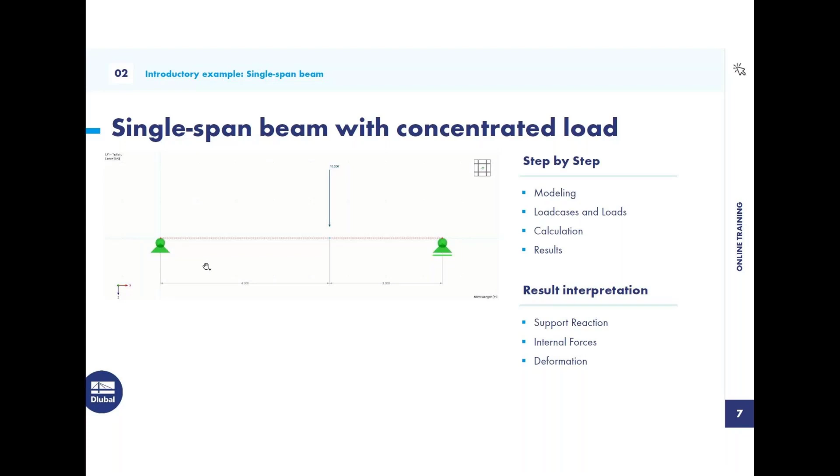First I will show you the modeling, then how I create such loads, then we will calculate this, and with Mia we make a control. So maybe then let's switch to RFEM.

Yeah, okay, back to the user interface. So for example, when we want to create nodes - they are the beginning of every modeling. Nodes are the begin, and on these nodes you can put lines or members, and surfaces need these lines as border.

So yeah, for example, with nodes, you can start here in the navigator, data, and click for a new node, and I will show you.

You can also here in the menu, basic, click also here nodes, or in the table you have also the option with the coordinates to create nodes, or even here in the shortcut. So you see you have different ways to model, but yeah, okay, then let's start.

I will close this, and then let's start with a new model. I call it online training.

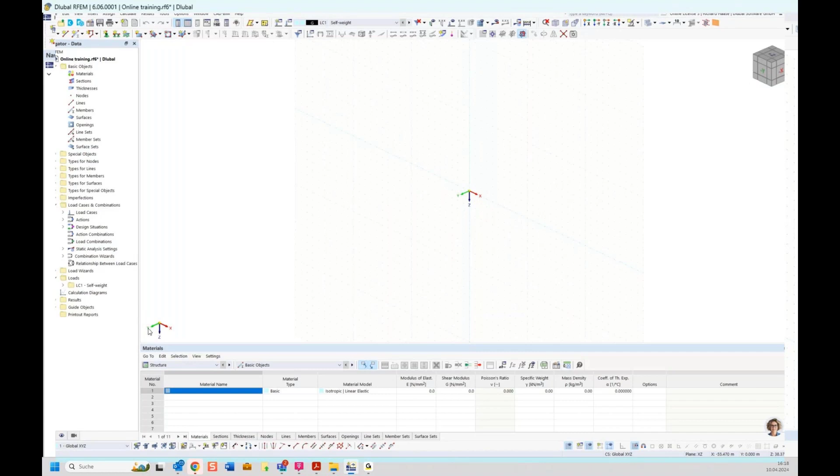How it's connected to the global axis system. You see the Y direction when I click on Y, or when I go to the X. Same idea here with views in X, Y, Z, or you can choose other directions. Another option is when you press Control and the middle mouse button, you can also turn around.

But let's start with the modeling. Our system, I said we have a 7.50 meter long single span. So let's begin with the nodes. I choose the shortcut and click to the 0,0 coordinate with it.

Now we have the first little problem. When I go here, we see the 4 meter, and when I go here, 5 meters. We want it in the middle. Now we have different options.

First, I can click on this node, and in this case it fits perfectly because we start at the 0,0 coordinate. Then I could change the X coordinate to 450 and say OK. Now you see it's on 450 how we want it.

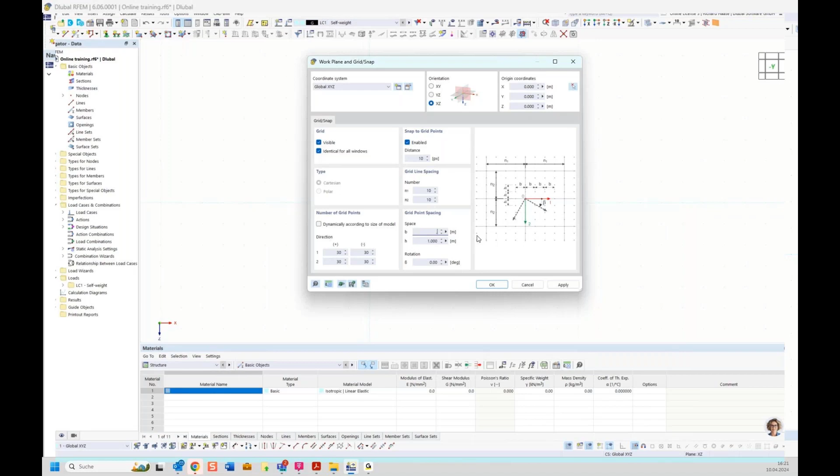But you also have another option. You can go here to this button, settings on work plane. The default setting here is a spacing of 1 meter, you can see it in the picture. We want to change it to 1/2 meter. Say OK. When I delete my node again, we can see here.

350, 450. So you have these two options to create nodes in an easy way. Then we need the last point at coordinate 750. Let's do it this way.

And maybe I'll set it to the default setting. You can also do it here. So now we have 3 nodes.

Maybe I showed this before: when you left click and go from left to right, you see orange color, and from right to left, you see blue. Maybe I'll continue first with a line. Let's go to the node, to this, and again to this. So when I go left to right with this orange color, and for example here over this line on this node, you see only this node gets selected.

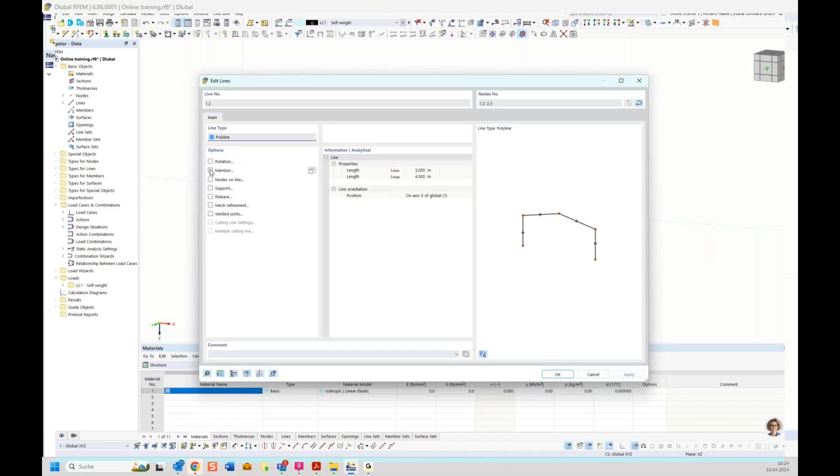Now this logic is defined throughout RFEM6. Maybe you remember with the base data, with the add-ons, where I said you must activate it so that the actions can be used. It's the same principle here. So we have this line, and want to transform this line or give this line some properties, and we say we want to transform this line to members.

Then it opens a new menu, the new member menu. What can we see here? A member type. The beam is, I'd say, the default type. The beam gives all forces to other objects.

For example, when we go to tension, you can always orient by these pictures. So we see here: for beam, all forces; and for tension, you see only tension forces can transfer to other objects. Same for compression, it's only negative forces here.

But let's go to another member type: here is a definable stiffness. Maybe it's interesting for you in your study time. There you see we have a new tab here, definable stiffness, where you create a new stiffness type. Here you can manually define all stiffnesses, torsional stiffness, bending stiffness, and so on. Maybe it's perfect for your book exercise, and you can manually create your beam this way.

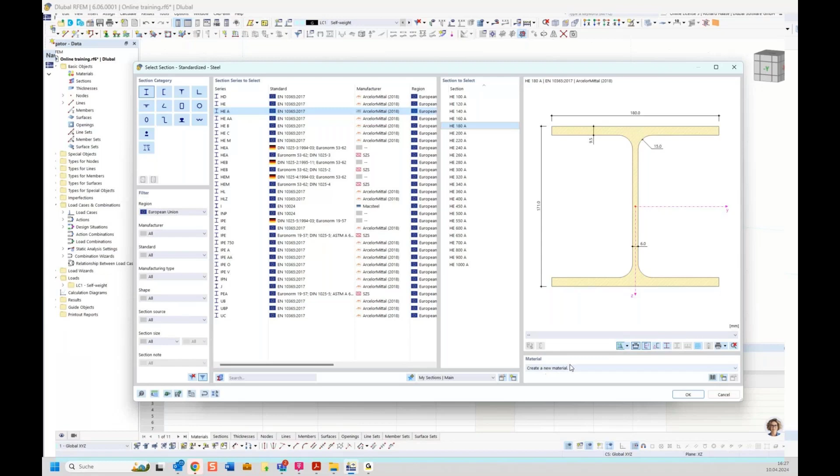And now you see this yellow color, because we don't have a created material yet. So let's create one - there's again a library button.

Let's say European Union, material type steel. And then you see, oh my God, so much steel. How can I find the steel I'm searching for? You see here this searching function.

Let's take an S235, and the shown steel options are reduced. Here you can see, let's select such steel, say okay, and you see the yellow switch to blue. The blue stands in our program for steel, and we say okay.

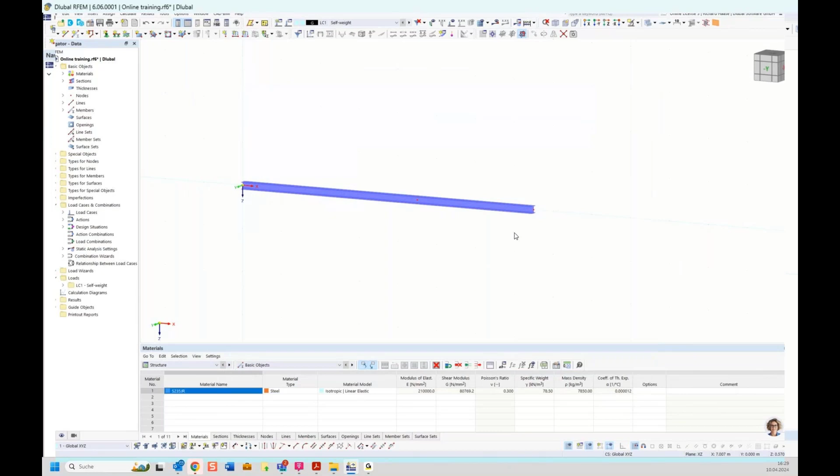Now we have an HEA 180 with the steel as S235. Say okay, and okay. And now we can see our property-less lines are transformed to steel members.

So what we need are the supports we have here and the loads. But before modeling this, I will give our AI assistant the chance, and she will calculate, and then we can control the RFEM6 results against the results of our AI assistant.

I copy from my document: a single beam with length of 7.50 meters with a single load at 450 of 10 kilonewton, and I want to know the bending moment at a length of 450. Then we start, and let Mia show us how good she is with her statistical knowledge.

So, in parallel, we can start modeling the nodal supports.

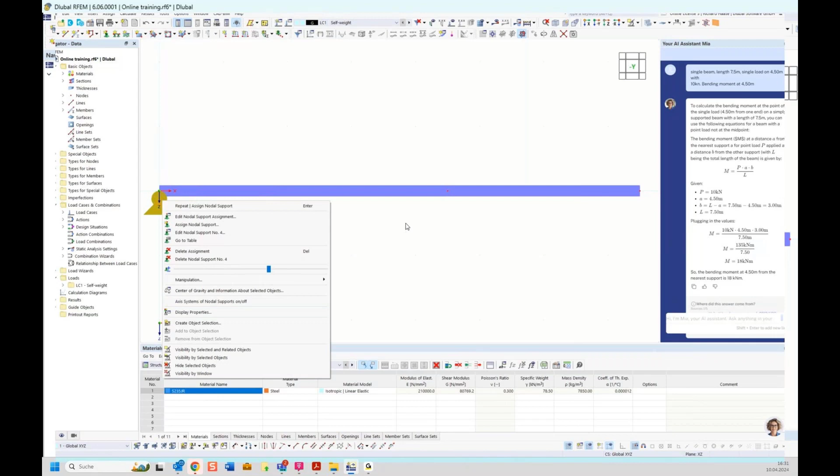And okay, we need another. We say we need here a nodal support with roller properties, and we say this. Take our point. Okay.

And yeah, what is missing? Maybe to control the length again, you can click here for dimensions. Okay, didn't I click on my first node?

Now we need our nodal load. We go to the option loads, nodal loads. But you can also do it here in the shortcut, new nodal load, or even through loads, nodal loads. So everywhere, also in the table, you have the chance to model in different ways. Let's do it this way: a new nodal load on our load case self-weight, and take this 10 kilonewton, that direction. Okay, on this node, say okay.

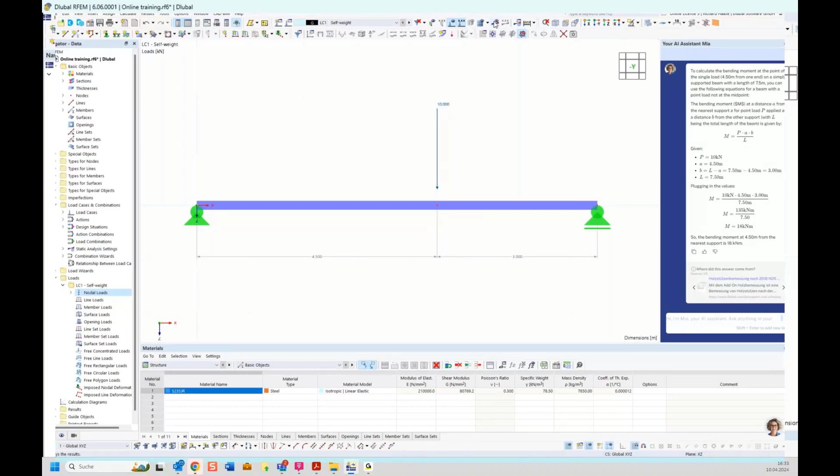On this button, you can start the calculation. For this load case, you also have the option to calculate all, or when you have more than one load case or a lot of load combinations and other things, you can select what the program should calculate. Global deformations - you see here the navigator results is new because we have calculated and have some results here. But we want to go to the members, internal force, and to the bending moment My.

Mia says we get 18 kilonewton meter, and our program said 20.4. So who's right? I say Mia is right, but what's the reason for this difference?

Maybe let's check the support reactions. So we have 10 kilonewton from the top side, and see here 5.3, 7.3... okay, it's higher than 10. So something must be wrong, or not wrong, but how can I say?

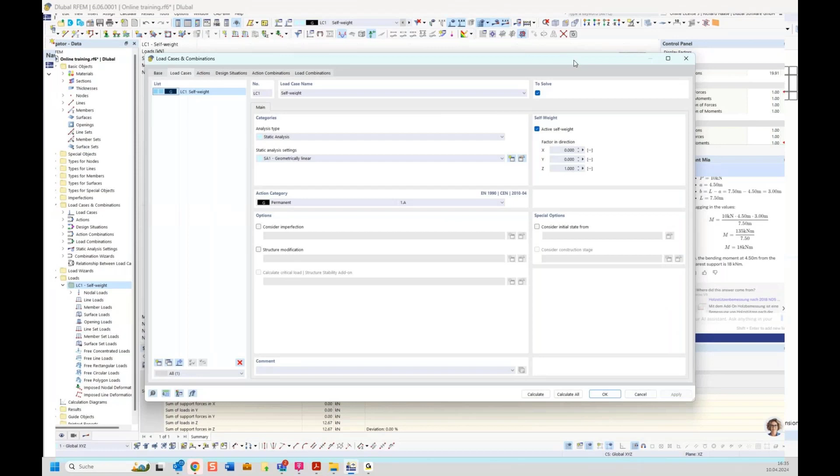We must prove some things, and the reason is the load case self-weight - when we go to edit, here we have an active self-weight in that direction. So we have created our steel section, and this steel section gives its own self-weight on the structure. The default setting is that it's activated, but I'll show you how you can deactivate it.

We go to the navigator and here to the display. Then we have here the loads and the self-weight. And you see here the 0.356 is the self-weight of this HEA 180 profile. And that's the reason why the results are not as expected.

So let's deactivate here the active self-weight and calculate our self-weight load case again with our nodal load.

Now you see here our 18 kilonewton meter, exactly that what Mia say. So maybe Mia can assist you with statical questions, or even if you have questions about the program, you can write it here and Mia will give you answers.

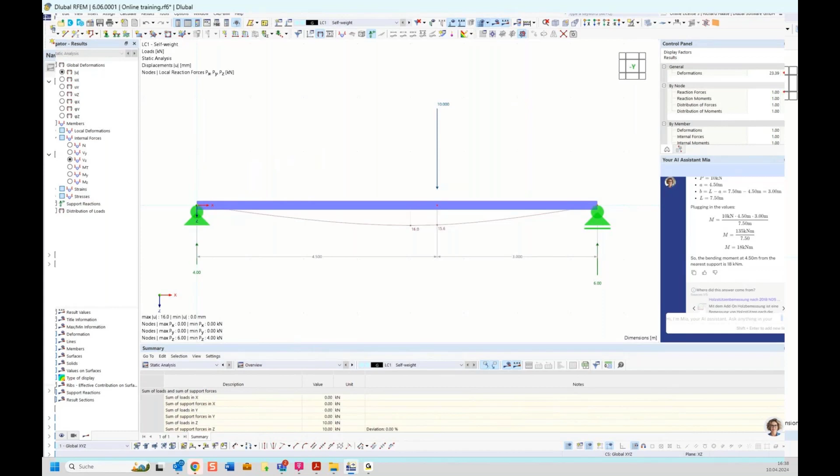Okay, that's enough for my first example. Then let's go to the next, a two-span beam with alternating load positions. We will create more than one load case, we will do 3. Then I will show you the combination wizard from RFEM 6, when you have different action types like self-weight and snow, wind, and so on, and how we combine it with the gamma and psi factors.

Okay, and another things, but let's start with the modeling of our second example. Okay Mia, thanks. Then I will delete my model. And we have 10 meters of the whole length.

So you have the options with the nodes and with the lines I showed you before, but there is also a faster option. You can create here a new single member.

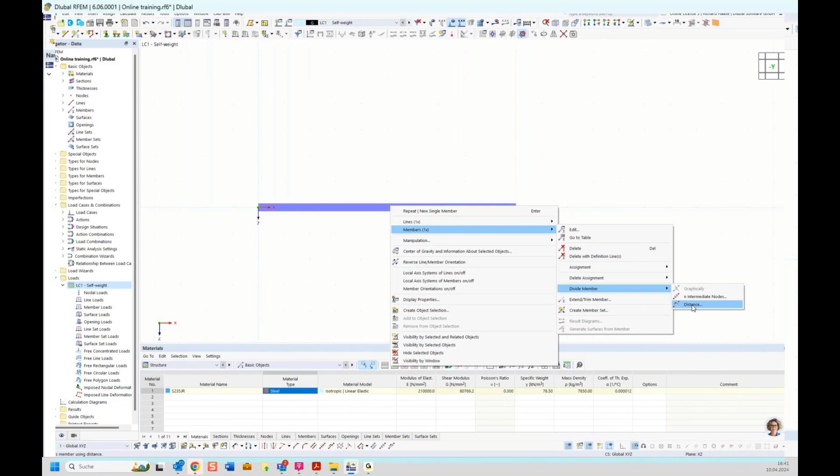Now we have a single span, but we want a two-span beam. So we click with the right mouse on this member, divide member, and the distance. Now you have the option between percent and meter, and 50%, 5 meter, that's exactly what we want. So we divide our member and have now 2 5-meter beams.

And now we need again our nodal supports. This type for our left node, say OK, and again such roller type nodal supports for the other two nodes, and say OK. And OK, then we have this.

And now I will show you how you create a new load case. You can right click here, new load case, or even in the shortcut, new load case, and again in the menu or in the table, so you are free. But I will show you here the shortcut.

There is our self-weight, we want to activate the self-weight again. And here you see the action category. The default setting is that this combination wizard is activated. So you have this action categories, and with help of these actions, it knows how to combine these actions in the load combinations. But I will show you.

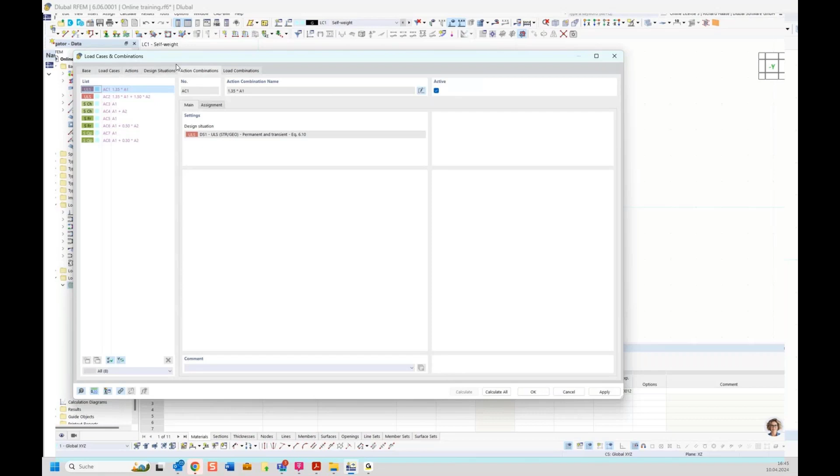Let's have a look at our ULS. So here you see Eurocode and information, the combination rules with this gamma and psi factors. Now we see he combines the actions, the A1 and A2 of our self-weight and the other action, and here the load combinations.

Okay, maybe here it's not so interesting, but I have another example where we have more than these two load cases. But you can see here he combines after this rule all load combinations.

Okay, that's okay. And now for our load case 1, we want to create a new member load, right click, and have 2.5 on both members. And you see, okay, he created. And for the left, the same new member load - on the left field, we want 5 kilonewton per meter, say on the left field. And now I could press the OK button, then close the load option here.

But I want to continue with my right field. So when I click here, apply and next, then I can see it's created, and I can easily switch to another load case. The same with 5 on the right field, and say okay. Now we are ready with our loads, and I close this with okay.

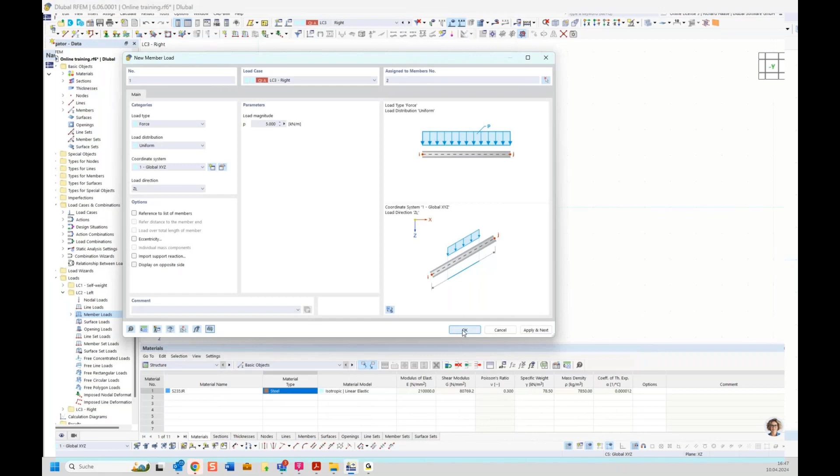Okay, and we can control it. We have the self-weight plus the self-weight of the HEB section, but I have deactivated it, though you can activate it again. Then our left field load, and on the right.

Maybe when you make controls with examples from literature, it could be possible that you get other results than in RFEM 6. And the reason I show you.

You can see it in the sections, this option, deactivate shear stiffness. So the default setting is that RFEM 6 calculates with the axial and shear stiffnesses, but in literature examples, most of the time they don't calculate with this kind of stiffness. So you can click here to deactivate it and make the shear stiffness infinity. I'll show you the difference with the shear stiffness.

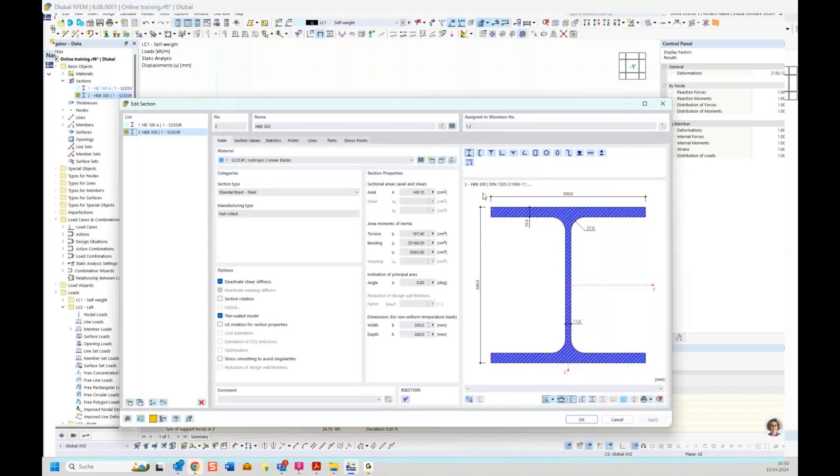So when we see the deformations, we have 0.3 millimeter here. When I deactivate the shear stiffness, making it infinity, let's see, we have 0.3. Say OK. We get only 0.2. So the system gets more stiffness because the shear stiffness is infinity.

So that's something you must know if you calculate with literature examples. Then deactivate it here, but I'll leave it active for our example. Okay, good. Then let's calculate all, and then I'll show you the results and explain something.

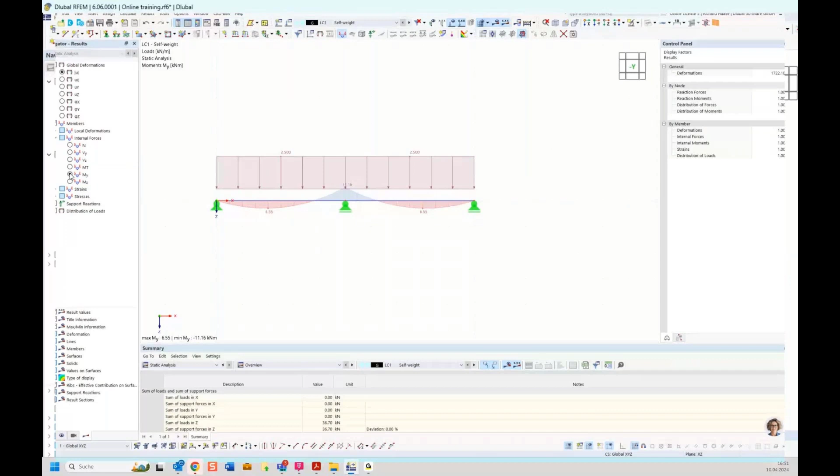Maybe we can choose the wireframe model here, it's better visible. Let's see the bending moments. We can also deactivate our self-weights and showing loads.

Okay, and we switch to our design situation. Now we see we have max and min values here. Why do we get this in this design situation? The reason is, I'll show you how he creates the combination rules. For the ULS, you see he has 4 combinations in this case, and out of these 4, at every location he shows you the min and max values.

Now we want to know where this result comes from. This minus 37, which combination gives us this result? You go here to static analysis, results by member, go to internal forces, and now we're at member 1.

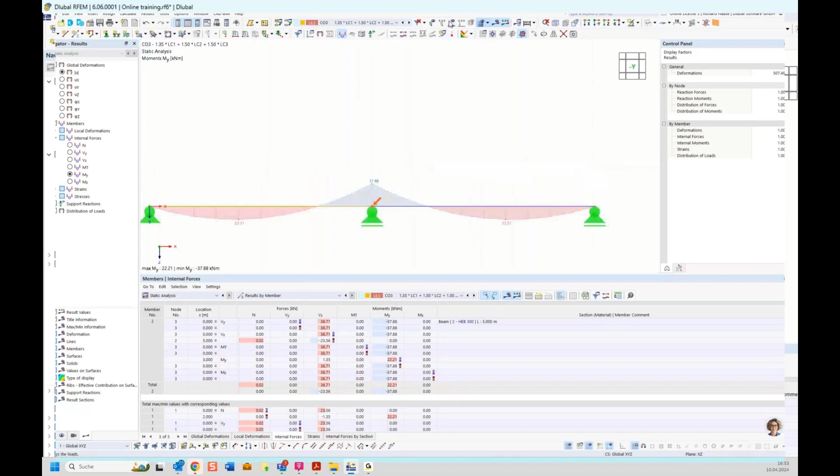So let's prove it, combination number 3. Let's show the loads again. And you see we have factorized our self-weight, and here the left and right field loads. So it makes sense that this one gives us this minus 37 bending moment.

Okay, then let's check it for the field bending moment. This 26.78, you say it comes from combination number 2. And combination number 2, you see here our self-weight with load case number 2, and load case number 2 was the load on the left field.

The same you can do for the support reactions. So maybe deactivate the member results, and let's see our support reactions. Now we want to know where this 77 kilonewton comes from.

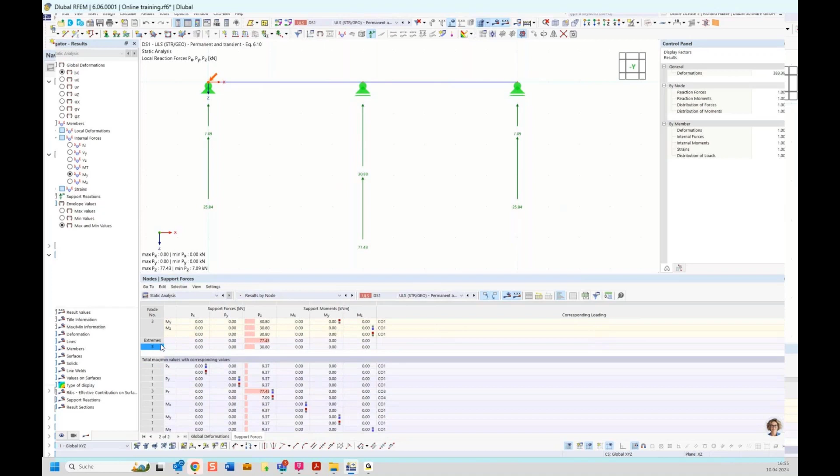Same principle: results by member, you must switch to results by node, because on this node is the support. Results by node, switch here to support forces. Now, see here, that's number 1, and we want to go to number 3. And you can see here number 3, we have the 77 also comes from combination number 3, and combination number 3 was self-weight, left and right field load cases. So that fits also well.

Okay, that was the second example. Then let's switch to the PowerPoint presentation.

And yeah, the next example is a Gerber beam or hinged beam. And this system, maybe it's the same as our 2-span beam, only here is a hinge, and through the hinge this 2-span beam gets statically determined. So they're a coupled system of a single span to a single span with a cantilever.

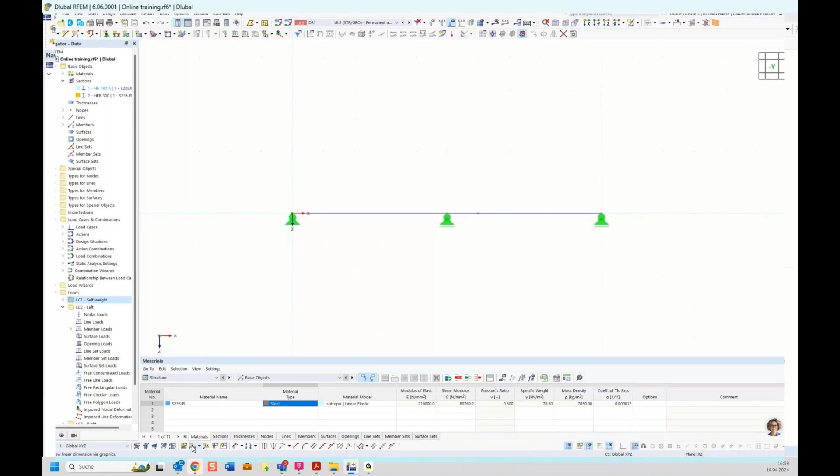Okay, good, then let's switch back. Let's say we take the same 2-span beam because it's more easy. Then let's say we want to divide this member and say only, okay, we say 1 meter. And on this case, we want to have our hinge later. So, but let's first set a dimension. Again, the second plane. Okay, for control.

Yeah, and another point for this Gerber beam is you see the maximum field bending moment is exactly the moment over the support. And it's for the design check more easy when you have one size to choose for the section.

Okay. Oh sorry, I open the German one. I switch back to English, sorry. One little moment, please. Okay, now it's open. I think you don't save it. Okay, then let's close and make new.

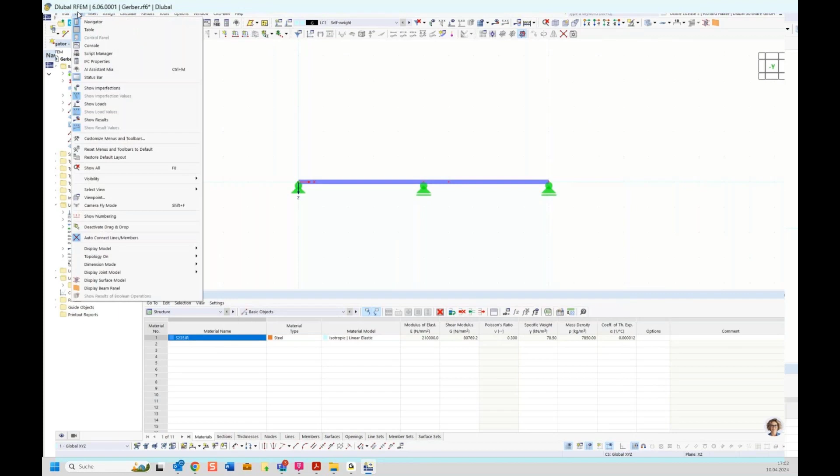And our nodal supports. And say here our roller, this one. Okay, a little bigger. Okay, so first, wait, okay, I will customize. Oh wrong. Reset menus and toolbars to default.

Okay, so now I show you how you parameterize your model. So the command is here under Edit Global Parameters. It's a little bit hidden. So when you can remember, I told you at the beginning that we have such a search function here, and you can type in global parameters, so you can find it there.

Or when you're working more often with this command, you can customize your toolbar, and therefore you go to View, Customize, Menus and Toolbars, and go here for global parameters. And every command you can find here or over this searching function. And I want to say, okay, this global parameters I want to add in my toolbar. Then left click, hold the left click, and I will add it here. And yeah, so we have it fast to find.

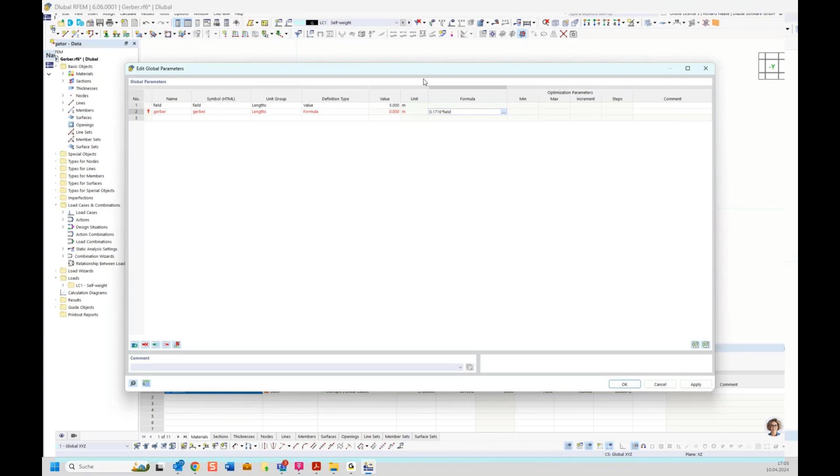So from our table book, it was 0.1716 times the field length. But this would be here, but we want to have our Gerber hinge here, so we must say another field length, and now we see, okay, it's at 5 meter... 858. Now, okay, now we have our global parameters, and now we must connect our model with these parameters.

So we go to, oh wait, before I forget, our dimensions. Okay, so good, maybe I save it. It's a good thing all the time.

Okay, so node 3. And now I say I want to have a global parameter, our field length. Go here and say, okay, and insert. Okay, 5 meter was before 2, but you see here this little yellow symbol, and there the fx sign for the formula, and say okay.

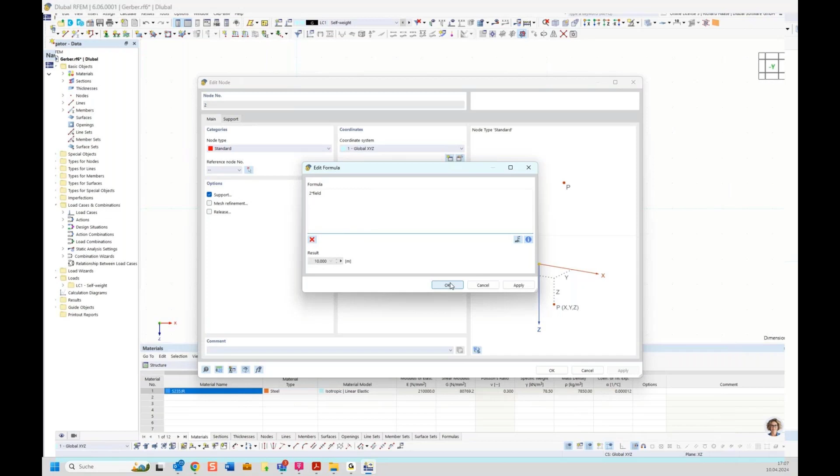And our second node, say here, and say okay, we want to edit the formula, and we say 2 times our field - that's the name of the global parameter. Say okay, and you see here 10 meters. That's right. Okay. And now our Gerber hinge.

Say again global parameter. We want to have our Gerber system, and you see our 5 meter with the yellow symbol. Okay, and you see before it was 1 meter, and you see it switched the length.

The last thing which is missing is our hinge. So let's go to the member, and again the same principle. We want a hinge. Important here is you see the direction - this is the start, and this is the end of the member.

So we need a hinge at the start point. We click hinge, get a new tab here, hinge, and we want a member hinge at the start. A rotational hinge, is that what we want to have? Say okay, and here we see our hinge. It's always the biggest size, but you can decrease or increase the size here again.

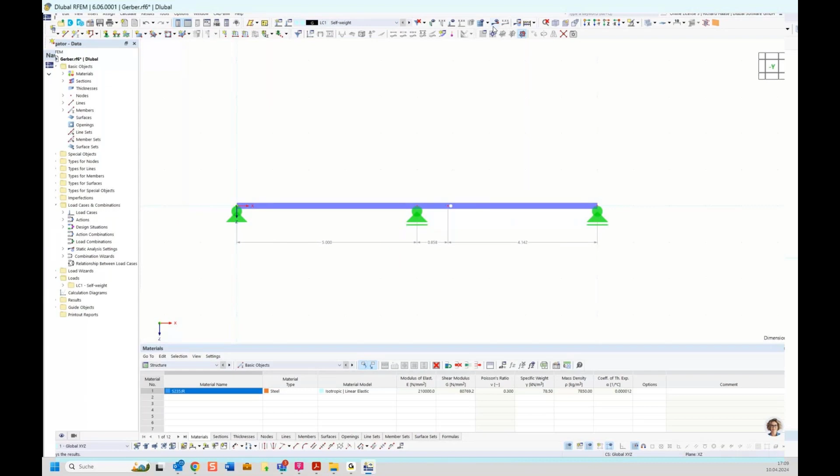Okay, so then let's view the self-weight load case to see if it functions. Global deformation we don't want to see. We want to see members, internal forces, and bending moment my. And we see here the same results in a field and over the support.

Now we want to check if the parameterization functions. So when I say okay, I don't want 5, I want 7 meter field length. Okay, it's a little bit big, so, and say okay. So you see 7 meter and 7 meter, and the hinge also springs.

So then let's prove it. Yeah, and you see, okay, a little difference, but 150, so we can say it's right. And yeah, so you have now a parameterized Gerber system. And yes, this parameterization you can use for all models you can imagine.

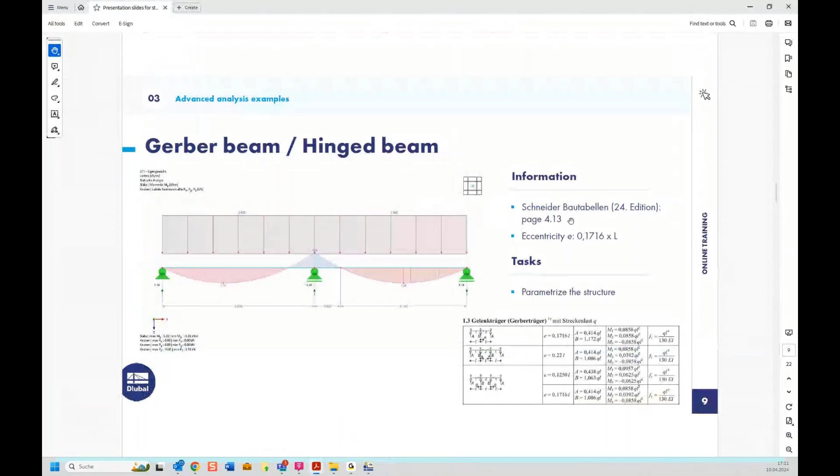And if you have such systems more often than one time, that's really good and saves a lot of time. Okay, then that was this example. And now, at the time we only used the member type.

Now I want to show you a frame with a tension member and show you the effect of such member types, and also the combination - you see here we want to model snow, wind, and temperature. Okay, then we can delete it here. Oh, wait. Sorry. Okay, yeah, then let's create our frame.

So we have again our HEB 300. Say okay. And 5 meter in height, and 5 meter and 1, 2, 3.

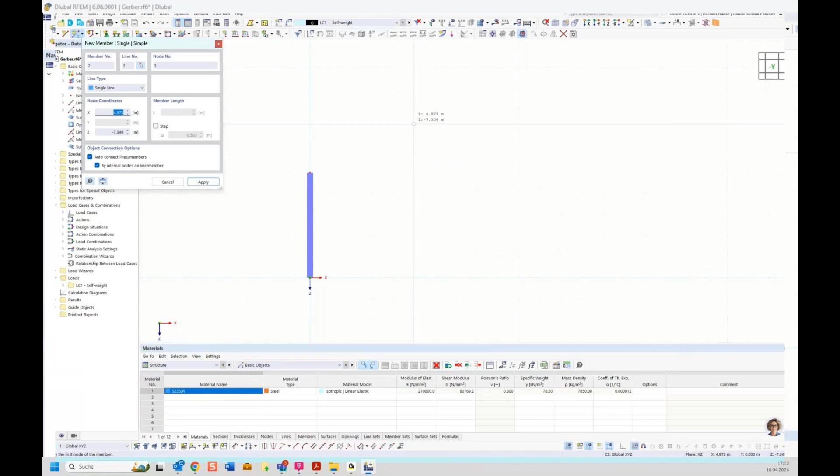And now, okay, our frame is symmetric. So you have the option to draw 2 other beams, but I will show you an option. Here it's fast, but when you have a big hall and it's all symmetric, you only need to model one half and the other you can make here. You can mirror the objects, and now I will show you how it functions.

So you select your objects and say mirror selected objects, and you want to create a copy and must set the plane. So you want the mirror plane as YZ. You must change it here to YZ and change a point - say here this top point - and say okay, and now you see you mirrored your system.

And yeah, for bigger systems or with symmetric and big systems, it saves a lot of time, and it's a very nice function.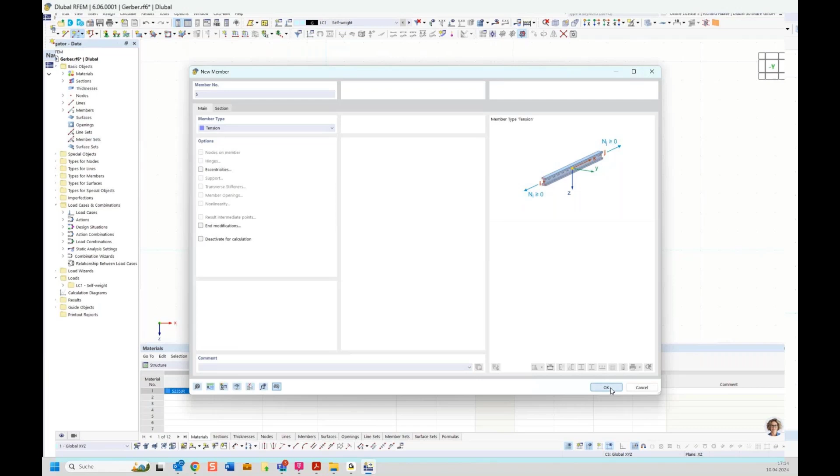Now we want our tension member, only positive forces. Okay, and select him here. Oh, yeah, it's the wrong section type, but let's change it fast.

We go to the library and want a bar type, a round bar with 30 millimeter. Say okay. Okay, it looks better. Good.

Yeah, then I want to show you first the loads. Let's make a new load case. We have here snow we want to have, and another wind, and yeah, you must choose a fitting action category, and another one temperature with action category temperature.

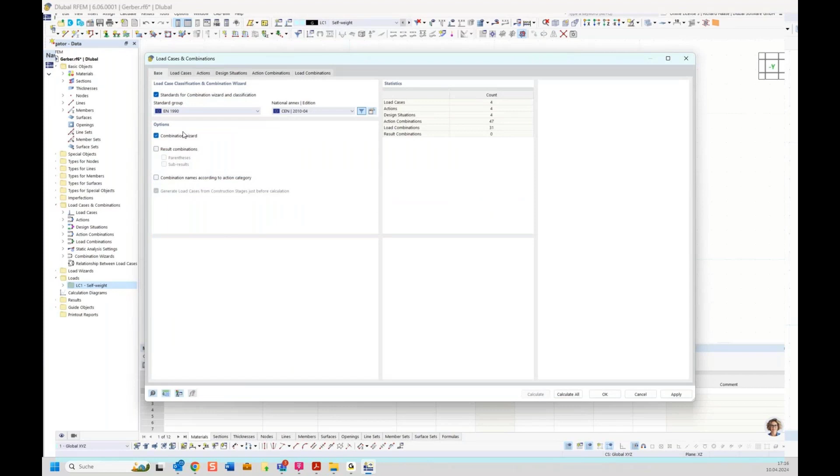Okay, so now we go to actions. You see, okay, now we have here on this symbols also that fitting action category, and now it's interesting and saves also a lot of time, this automatic load combinations with the combination wizard. And okay, that's only the self weight, but look here, we have self weight, snow, and wind with a leading action category, and the not leading get the psi factors.

So, and this is very good, and you have more for fatigue or for seismic. So different rules, and with the help of the wizard, you don't need to make it manual. It's fast, and you're on the safe side and have all possible combinations.

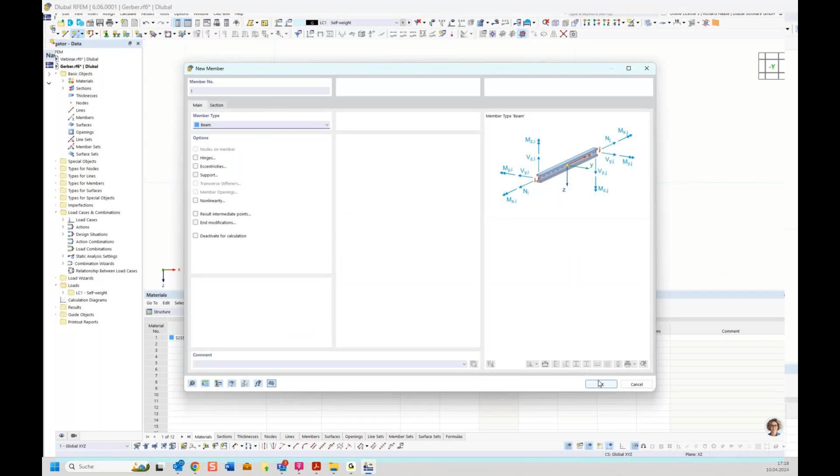Okay, restore. I hope he saved it. Then let's fix modeling it again. Wait, maybe I have it here. Gerber, maybe. Okay, then I have some right materials. Okay, so we had here our 5 meters.

I started new, must depend on this new GoToWebinar. Normally it don't crash. Cannot be moved. Okay. Then I will try it again, and he is away again. Okay, one more time.

Otherwise, we can maybe go into the coffee break, and I can try to either model it afterwards, or we leave this example. Oh, okay, maybe yeah, it's a better idea. Yeah, okay, yeah, maybe my PC gets some problems with the new GoToWebinar. Yeah, then let's do it in this way. Yeah, then let's go into the coffee break.

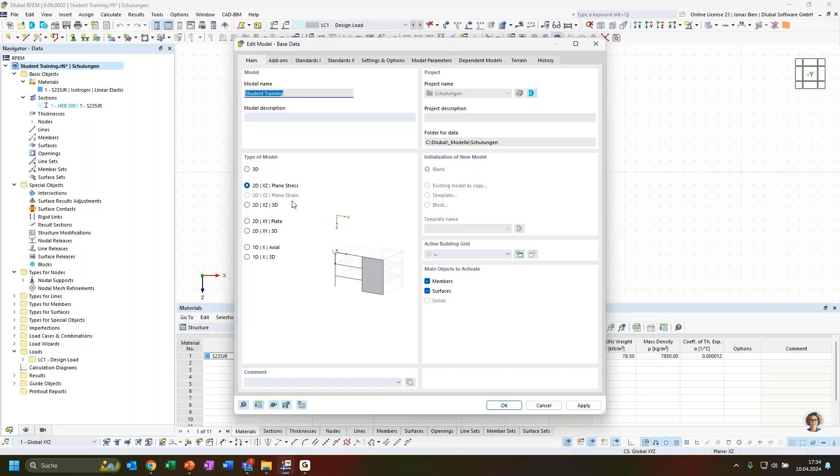Okay, let's go ahead and go to the program. I opened a blank model. The only objects that I already included in this model are material, an S235 mild steel, and an HEB 300 section. This was already defined by Richard, so you know how that worked, and I won't go through that again. The model is also still based on a 2D type model, so we will not yet go into the three-dimensional realm.

Yeah, all right. So first of all, we model the single span beam. So therefore, we create a new member with a member type beam. The section would be HEB 300. Click OK. The length should be 16 meter 50.

So I don't have a point to grab here, so it's actually hard to find the correct length. So therefore, I would just use this input dialog to set the length to exactly 16 meter 50. The important part, if you use that, is that you don't go back into the graphical user interface. If I type in something here and then go back to the main window of RFEM, it will directly overwrite my input value. So I need to make sure that when I input this value, I hit enter or apply before I leave this window with my mouse cursor.

Alternatively, one other solution would be to adjust the grid or to manually change the coordinate of the second node. There are multiple ways to define this beam of this exact length.

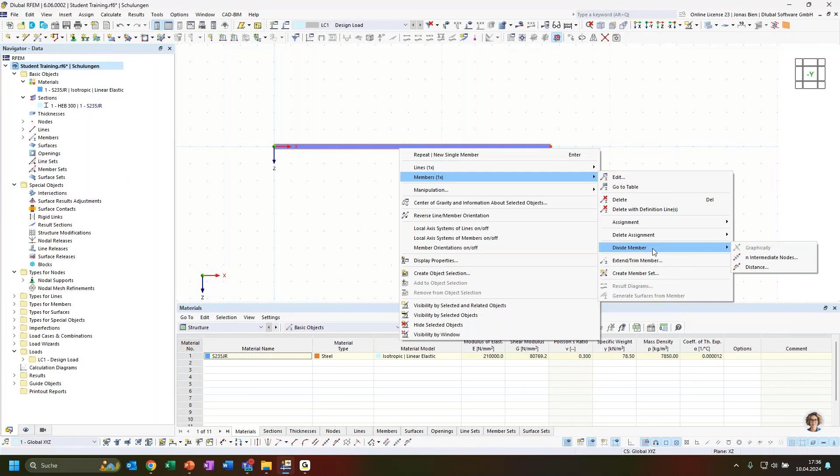Then we had two additional nodes on this member where we want to connect the vertical truss members. So I divide this member by two intermediate nodes, and I set the option to create nodes on member, because I don't have to divide this member this way.

It can stay one single beam element. Now, how do I define the secondary truss structure in the best way? One simple way - let me show the task again. The vertical distance of these two nodes is given as 1.40 meters, and the vertical distance at the

member ends would be 2.30 meters. So in order to achieve this position of the truss end nodes, or to create these truss end nodes, I can use my copy function. And I think the best option would be to take the nodes on member, the intermediate nodes, select them, go to the copy function, and say I want to copy these nodes in Z direction by -1.4 meters. And then I need to make sure that I want to create a copy.

And because these nodes originally were nodes on member, when I copy them away from this object, they are directly transferred into a node of type standard. And now I could define my truss members between the two nodes.

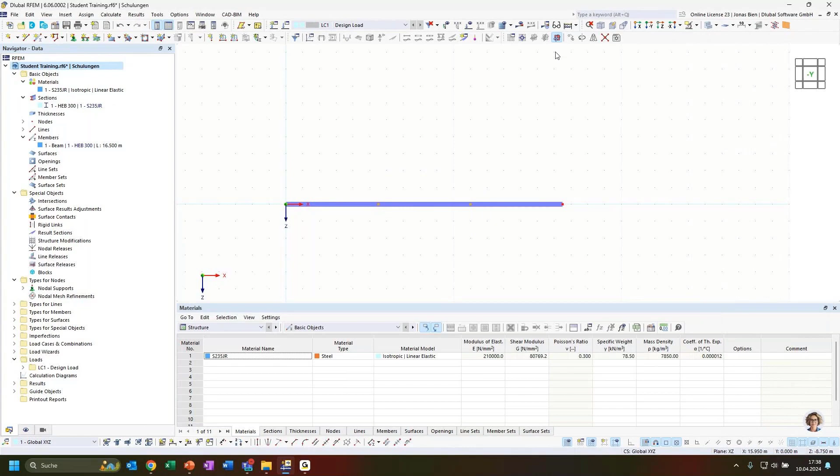What I could also do, and I want to show you that alternative option - here it doesn't make so much sense, but in larger structures that's a very nice feature you can leverage to speed up a modeling process.

So I again select the two intermediate nodes, want to create a copy, and then in the additional options I say I want to step the links. That gives me the option to not only copy the nodes, but to directly

create lines between the two nodes, and I can also on these lines directly create members. So when I hit OK now, it would copy the nodes, create lines between the base nodes and the newly created nodes, and create members. And how this member should look like, I have to define.

I could either give a template member from my structure, or I define a new template, and that I want to do because this definition of this member should differ from the first beam I defined. So I want now to have a truss member, and the section shouldn't be HEB 300, but an IPE 200 beam. So I create a new section, created via the quick search up here, and create a new section number 2 of the type IPE 200.

One thing to add: Richard already told you that on the right side here you see which degrees of freedom these member types have, and there's a very nice indication of what internal forces are transferred at the end nodes. If you are unsure, I want to add that you can always

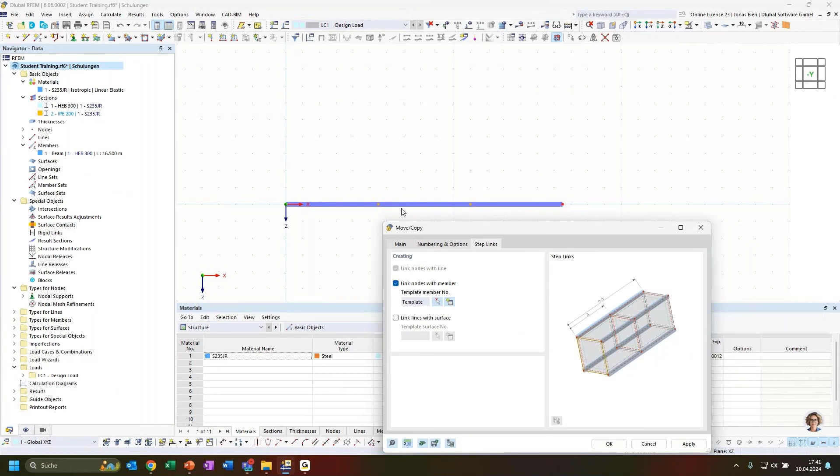Now I have finished the definition of the beams that I want to create with this move copy command, and then I click OK. And now you can see with the copy command for these nodes, I have directly now 2 additional members, and I don't need to do anything with this - that's already quite nice.

And then in the second step, I would take the outer nodes at the beam start and beam end and copy them minus 2.3 meters in that direction.

I could also, like if I have the dimensions here in this PowerPoint presentation, 1 meter 40 plus 0.9 meters, of course I can calculate this in my head, but if I don't want to, or if the numbers aren't that even or easy to sum, I can type the mathematical operation in this input dialog, and it will calculate the correct value for me.

What's also nice is I can enter values with units. So if I type in 2,300 millimeters, it will automatically convert it to the unit used for this particular input. This is very smart.

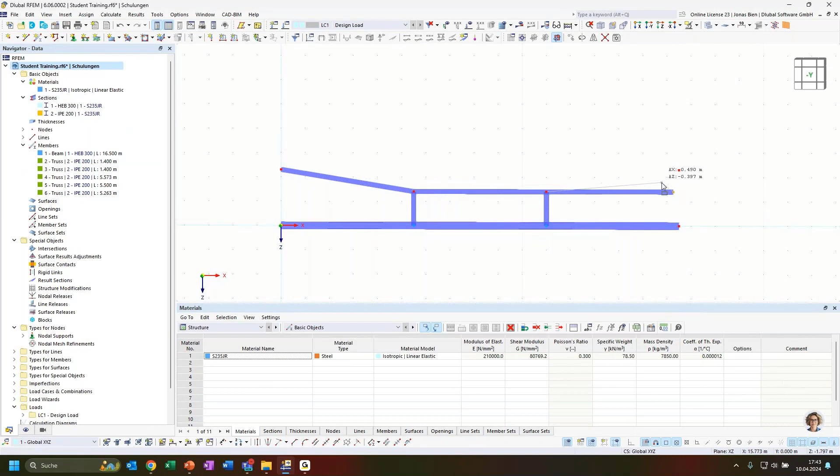The remaining truss members that define my secondary support structure up here, I can create by linking the four nodes. Oh, I misclicked, but no problem—I can just drag and drop the end node of this member and release it on the node I created before. That's also no big deal.

So now I've defined all the members, and I can already see that they have different cross sections when I activate the rendered view. Up here you can toggle between different display modes for members: a transparent rendered mode, the wireframe model, and the solid rendered mode.

But sometimes it's hard to see whether there really are different sections—they could have the same height but different section dimensions or whatever. So I want to show you another function that lets you easily distinguish between different sections or beam types. You can go to the Display Navigator tab, the second in our navigator, and under colors of rendered objects, you can color the beams or members by their properties.

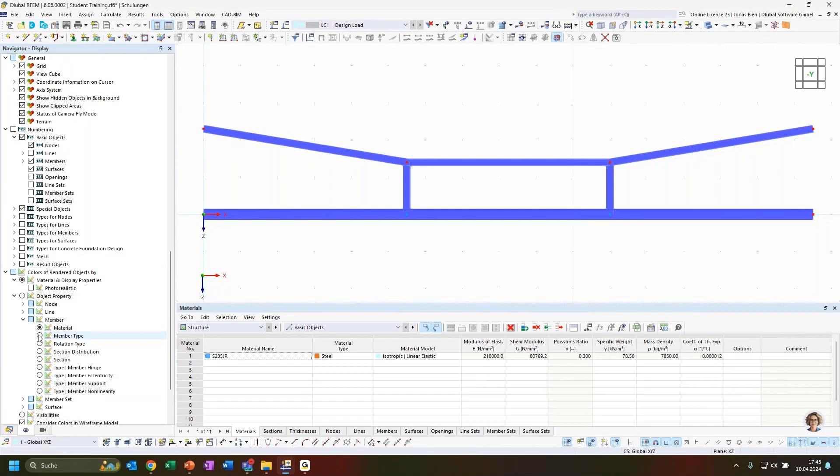For example, you can color it by member type. If I activate that, I see the lower member is now colored blue, which stands for beam member type, and the rest of the structure is colored green, which stands for truss member type.

I can also do that for section, to highlight that I have different sections in my model. On the right side in the control panel, I automatically get the corresponding legend to the current setting. This is quite nice to get a better overview of the elements and objects you've defined in your model.

So what's missing now is the load and the supports. Let's start with the nodal supports. I want to add a nodal support at the start of my beam, fixed in Z and X direction.

I want to apply the same boundary conditions to my end nodes at the upper support structure, this secondary truss structure. And since the lower member should just be a single span beam, and I don't want any additional restraints in the horizontal direction, I assign a roller support to the member end so it can move freely in the X direction.

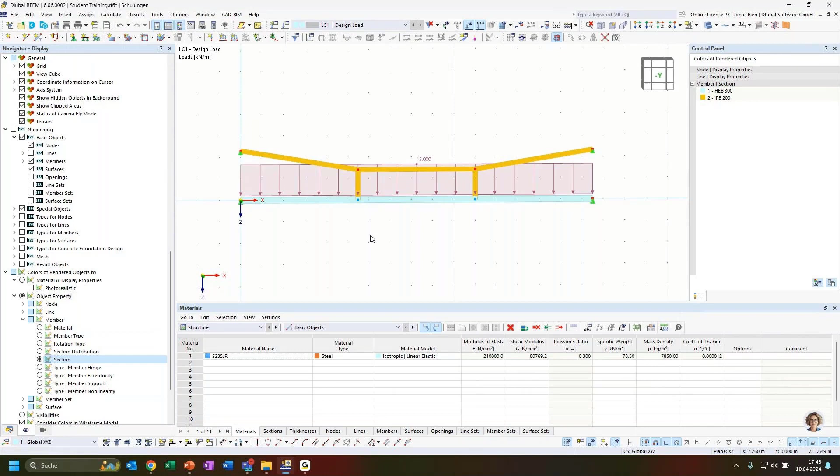All right, so now everything is set for the analysis. I've defined my members, I've defined the load, I've defined the supports. So I can now run the simulation. I do that by asking for the results, and since I don't have any results yet, it automatically calculates.

And then I can access the results navigator and first look into my global deformations. I will switch off the loads just to make it a bit more informative or easy to see those deformations. And then I could also switch the display of these deformations. For example...

I mostly like to analyze member deformations by using this option to show the sections colored, because in this way I not only get the deformation of this wireframe model, but I can directly see the intensity of the deformation by the plotted color. And moreover, I could already see if there would be some torsion in the members by the display of this cross section. I could directly see this, whereas in the wireframe model, I can only see the overall deformation at a certain point along the member.

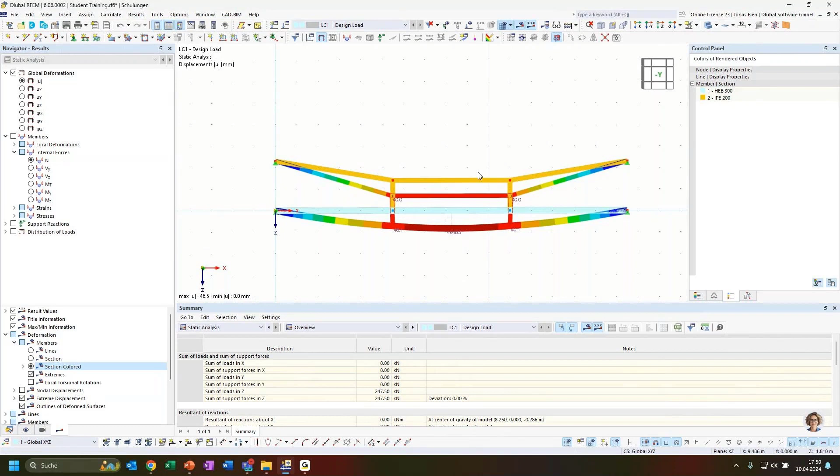So that's also useful. And what I see now is that I have around 45 millimeter maximum displacement at a midsection of the single span beam down here. And of course, the upper support structure is also deforming with it. It's elongating in these truss members, because all of them should be under tension, and we can check that if we proceed and go to the internal forces in our system to better read the forces.

I go to the wireframe model and deactivate the rendering, and now I can see that I have very large tensile forces in this above supporting structure, and a vertical normal load in this vertical members of 75 kilonewtons, and these would be the support forces for these intermediate supports of this single span beam.

The beam itself is free of axial forces, because I released the horizontal support condition at the member end, but the single span beam below has vertical shear forces and also bending moments around the strong axis.

And I can see by this jump in the shear forces, that part of the shear forces are transferred to the upper substructure. But the exact values I couldn't read from this exact diagram because I only get the extreme values and the values at the end of each member.

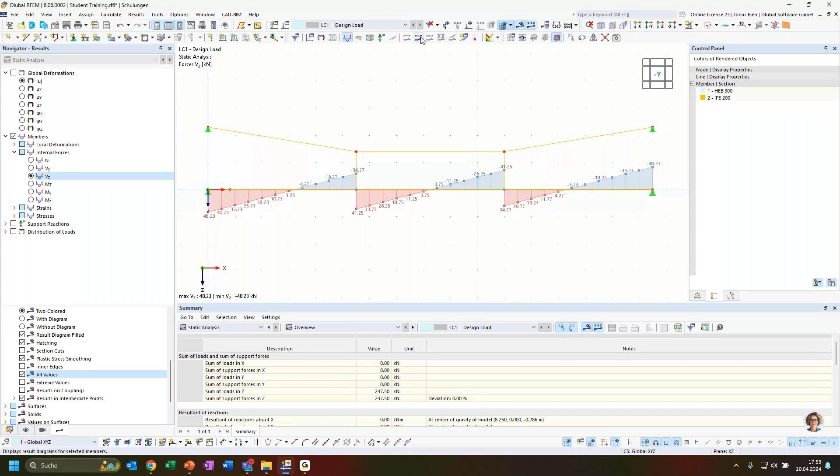Another way to further investigate the results in detail and maybe to compare different result values is to open a result diagram. I just select a member and can use the toolbar to access the result diagram, or I could also right-click on it and open the result diagram via the context menu. And if I do so, I get the results that I want over the whole member length.

Just as you can see here, the member length or the actual coordinate of this member is plotted up here. So it's 16 meters 50 long, and along this length I can now go into the design details and check every value, where it not only gives me the values at the interpolation points, but it also interpolates between those result values.

And I can activate as many result quantities as I want. So now I have the overall deformations and the shear forces, but I could also add the bending moments here if I want to, or the axial forces, which are of course 0 in this case. But that's a very neat way to compare results and also to document results. I could directly print this figure into my report.

Moreover, I have the possibility to average some results. I can just double click up here in this x-axis bar, and then I can create an averaging region, and it automatically calculates the average result value in this particular region, and I can interactively move it over the length of my member to get the mean value or average value within this window. This can also be helpful in some cases, like if you want average support reactions or something like this, you can use this function.

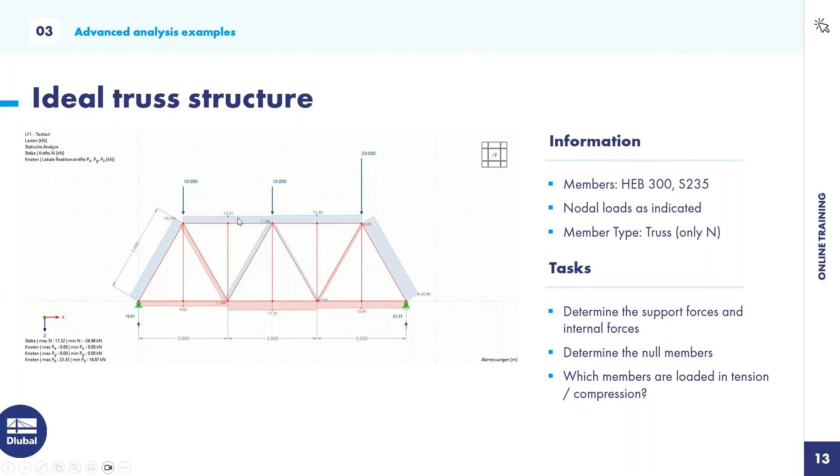Just as a quick note, this truss is made of multiple triangles, and all the triangles have the same length of 3 meters, which means that they also have the same opening angle. So if we first neglect those vertical members that divide those triangles, we can model the truss structure in cells of triangles that have the same opening angle and the same member length, and we will do that now.

I want to start with the first diagonal that goes from the origin to the upper right. I know it should have a 3 meter length, and it should also be oriented with an inclination of 60 degrees towards the x-axis. But how can I actually do that? Because in this case, our grid doesn't really help us, and I want to show you what you could do then.

One simple way to tackle this problem is we could use the member definition 'single general,' which gives us some more options to generate the beam. Of course, we first have to choose the member type and also the section as before. So we want to model the truss structure using only truss members.

In this case, we said that we want to also neglect the self weight of the members, so I choose the member type 'truss only N.' This will only transfer axial forces and no shear forces due to self weight of the members, for example. The section will be HEB 300 again.

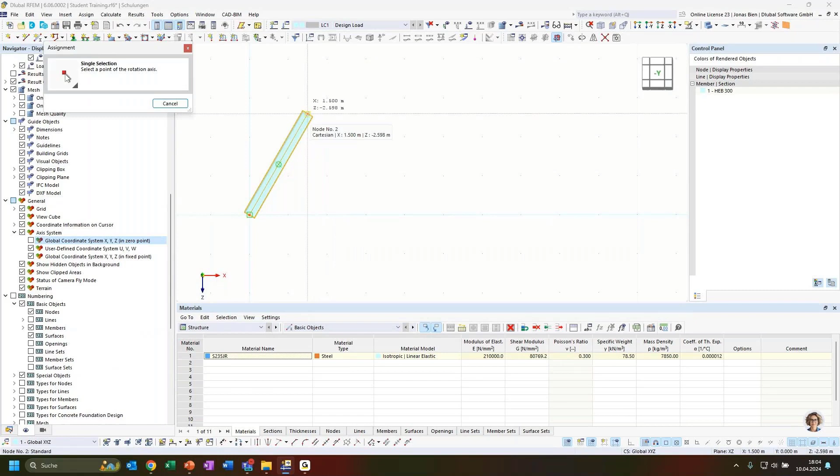Now I want to get the other diagonal and also the upper chord. One clever way to do this, and this also allows me to introduce another option for member generation, would be to use the rotate function. So I select my member that I now defined and choose to copy this member by rotating it. I want to create 2 additional copies. The rotation angle should be 60 degrees, and it should do this rotation around the y-axis. That's correct, the y-axis is pointing out of the working plane. But the origin of this rotation should be my member end, the upper end of the first member that I have defined. If I now click on OK, I directly get 2 additional members that are rotated by 60 degrees respectively.

So I can also measure this just to show you. I can measure the angle between the 2 members, and you see it's rotated by exactly 60 degrees.

Okay, so that would be a good starting point. Of course, now I need to add this substructure, or additional diagonals and upper chords, to the model to finish my truss structure. And to do this, I can use the drag and drop function.

So I can just select all the members and nodes I have so far defined. Click next to the lower left node, because that would be the node that I want to connect when I copy this piece of the model, and then hold the Shift and Control button at the same time on my keyboard, and then I can with left click and going somewhere in my working window copy this substructure, and I can also snap to the existing node or some grid points to place this substructure another time at this location.

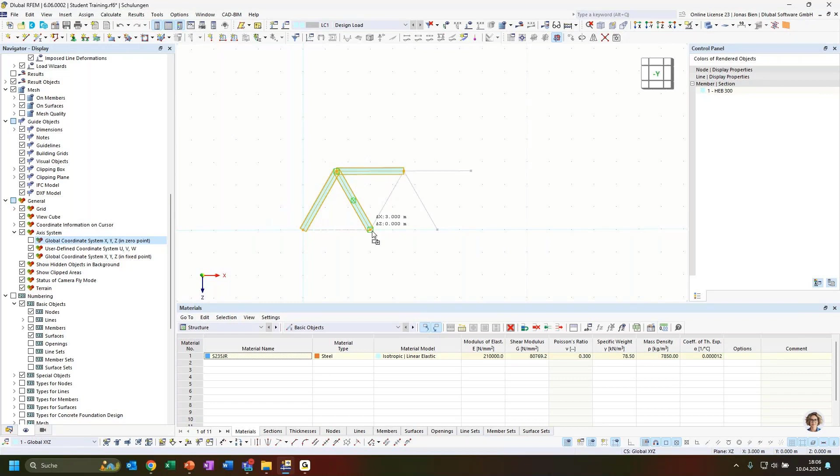And I want to connect it with the first one, so I could just do it like this, and I would have 3 additional members very quickly. I could also just choose these 2 diagonals, copy them the same way, and that would be a big step towards the finished truss. I can also copy the upper chord the same way, just selecting the upper 2 members, Shift and Control, left clicking, dragging it to another control node, and that's how you easily finish this truss structure by just copying with the drag and drop command some substructures or pieces of the complete structure.

So that's very convenient and can be done with many objects, not only with nodes or members, but also with special objects. You can use this drag and drop function.

So that just leaves me with the missing vertical truss members that, so to say, divide my triangles by half. So I generate additional truss members, and I create them by selecting this upper node of my first triangle, and then I can snap to the midpoint of the first member of the lower chord. There is by default a snapping point that I can use to generate this truss member.

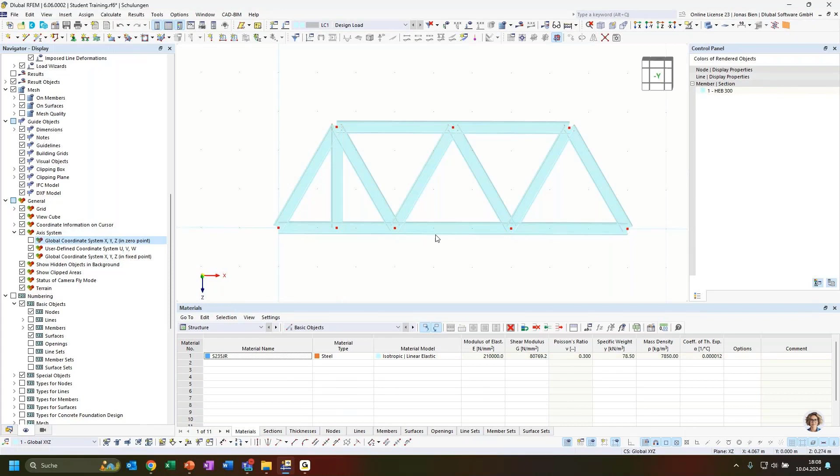And once I have defined the first one, I could again use drag and drop to copy them to the remaining places or locations where I need them. Or in this case, because I need to copy it 4 times, I can do it even quicker by just using the copy command, because here I can copy multiple times in one operation. So I can create 4 copies and just need to define the displacement vector, so from where to where should it move and copy the existing or selected member or structure.

And I can define this displacement vector by just clicking 2 nodes. And now it will copy this member 4 times, and the distance between the copies will be 1.50 meters in X direction. I hit apply, and with one operation, I get all the vertical members that were left.

Okay, then I need supports. I assign nodal supports to the end nodes of the lower chord. The left node again will be fixed in Z and X direction, and the second node will be a roller support.

So I have no restraints in my model. It's statically perfectly determined this way. And then I need loads.

In the description of this task, it said we should apply 10 kilonewtons to the first and the second top node of the triangles, and a load of 20 kilonewton to the last node here, in Z direction of course. And yeah, that would basically be it.

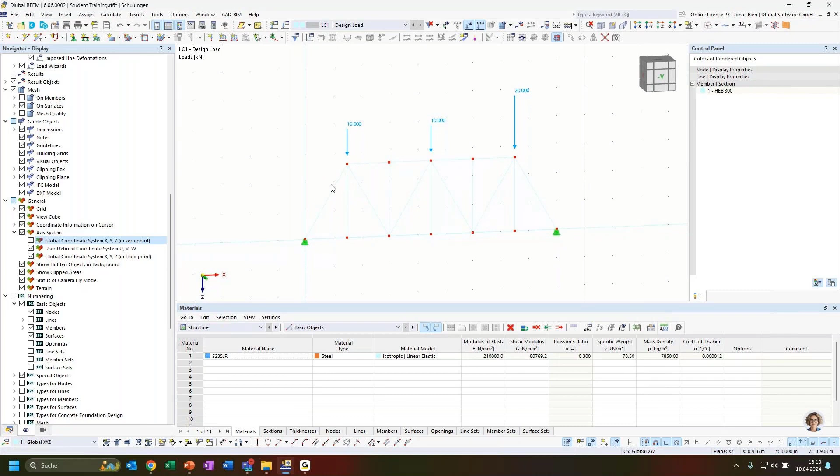This is a bit hard to see. I can also switch to the default display properties. I can always go back to the default options if you've modified something here but can't find a way to turn it back, or find the option that you modified. You can just set everything back to the Dlubal standard. That would also help you in most cases to get a good default setting for your display, by just clicking here in the navigator and right-clicking it, and you get the option to reset to Dlubal standard.

Okay, now let's solve this model with the applied loading and try to solve the tasks that were asked. So again, we can check the global deformations, but nothing too crazy happens here. Everything that we see is expected, I would say.

But the interesting part is when we look at the internal forces, and to make sure that we now have only axial forces in the system, we can go through them and we will find that we only have values for the internal axial forces, so for N, and these ones we want to investigate a bit more deeply. So the first task was to determine the support forces.

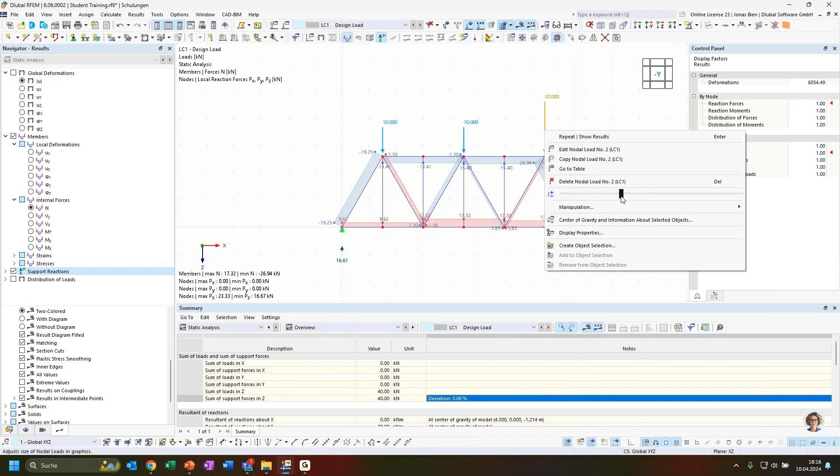All right, so that would be it for this structure. We can adjust a few things, because I see this question in the chat. We can adjust the size of some of the graphical objects by clicking on it with the right mouse button, and then we get a slider in the context menu where we can quickly manipulate the size of this graphical object. This is true for forces or also for supports, so I can also right click on supports to make them bigger or smaller. But for the support reactions, we don't have this feature.

So for them, if you want to go a bit deeper and change the size of those arrows, or change the color or the font, you can go to the display options, options and display properties, and you would find under results, support reactions, nodal supports, settings to manipulate the size of these arrows. You could change the thickness of these arrows, the color of the arrows or of the text, the spacing between the arrows and so on, and save that. You could also generate templates with these particular graphical settings and load them in your next projects, so you can save and load templates for these display properties as well, so you don't have to do this for every model over and over again.

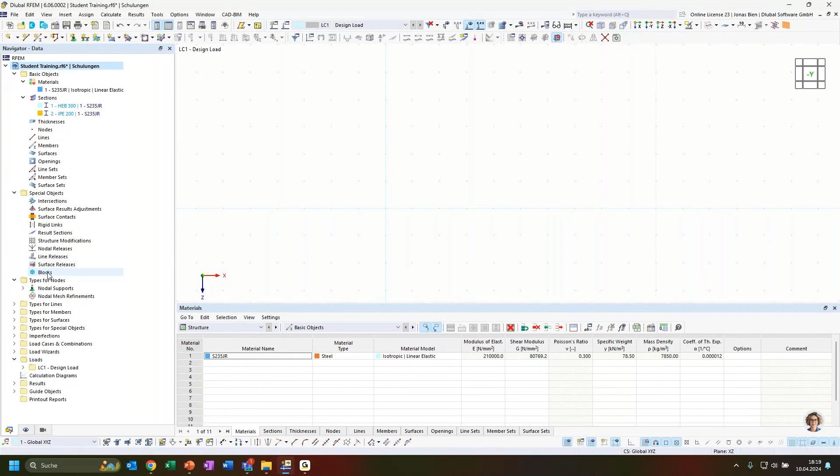For standard structures, we offer large libraries of pre-generated structures or substructures, which are called blocks. And you can access them, for example, via this block manager function here in the toolbar, or you can find the blocks under special objects. And if you want to use those blocks, you need to work in a 3D model type, so it asks me to change the model type to 3D. This is of course okay.

And now we want to select a new block from the library. This would be where you end up when you go to this block manager button up here. Then this huge library of predefined structures will open, and they are sorted in various categories. So for example, we have those 2D trusses here in this category, trusses 2D. And the first one in this list would actually be the one that we should import into our model. But there are, of course, several ones with varying complexity, so you could also find the truss that we just defined manually.

You could find it here in the blocks manager, but the blocks manager is not limited to trusses. We have also complete structures that you can import, we have bridges for example predefined that you can directly import and play around with. And the best part I want to show you about these blocks: when I select the truss type that we want to choose, you can see that I can now say where I want to insert it in my model.

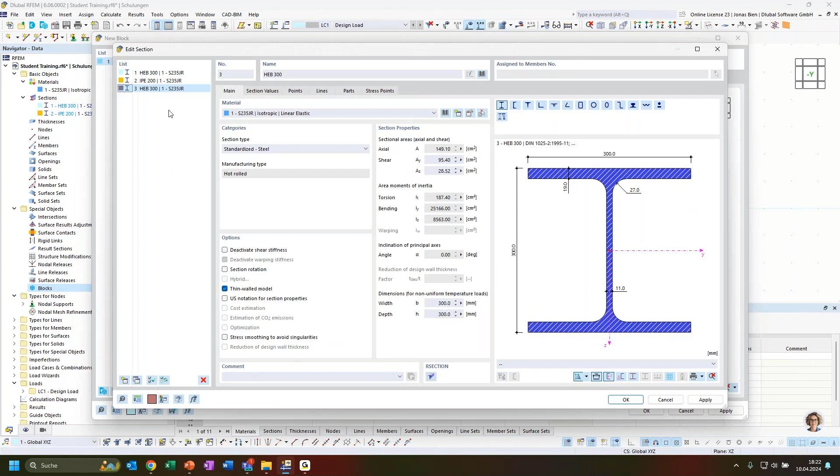I go back to 6 bays that I want to use, and then besides the geometry, I also have for this particular block options to define the sections of the top chord, bottom chord, diagonals, and verticals, and I will do that as well. For the upper and lower chord, we should use an HEA profile, so I just generate a new section type for that. The chord should be an HEA 300. I define that, and while I'm here, I can also directly define the 2 remaining section types that I need for the model. So the diagonals should have an IPE 160 section, and the posts or vertical members should be an HEA 160. All right, and it's as simple as that.

This would be my 3 section types that I need, and then I can assign them. So the top chord should be HEA 300, bottom chord should be HEA 300, the diagonals should be IPE 160, and the verticals or posts should be an HEA 160 section. I can also alter the support conditions, but I will leave them as standard.

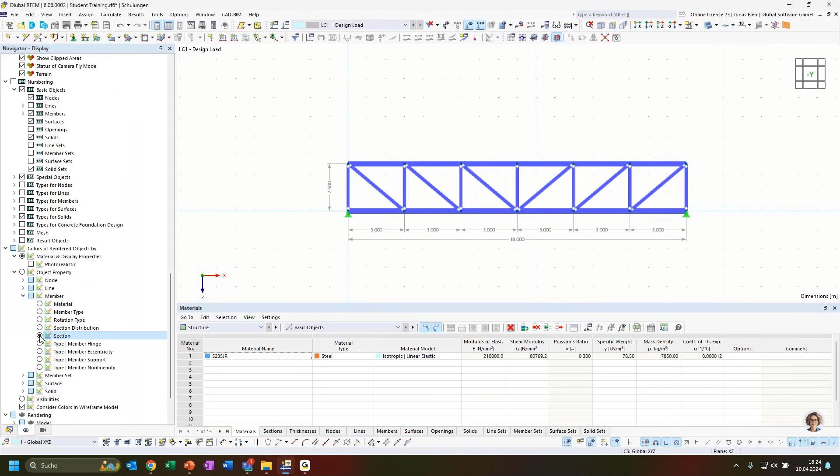We don't want to calculate anything on this model. I just want to show you how to work with these blocks. So when I apply or press OK in the block dialog, this block is inserted into my model with the configuration I made. When I show the sections by color, I can directly see that my sections are correctly assigned in the model. I also have the dimensions directly taken to the model. That is a very easy way to generate such substructures.

And I could now generate multiple of these substructures, for example a combination of such frames and trusses to create a complete industrial hall made of steel. So that would be quite easy.

These blocks are still a block object, so I can still find this block that I just inserted under the special object blocks. And I can still use the parametrization to change the objects of this block. So I can still alter the number of bays, and it will directly update it in the model.

What I also want to show you is what's behind these blocks. These blocks are generated by a script written in JavaScript, the programming language used for our in-app scripting at the moment. The good thing is, if you want, you can modify those scripts. They are locked by default, but you can unlock them and change them according to your preferences.

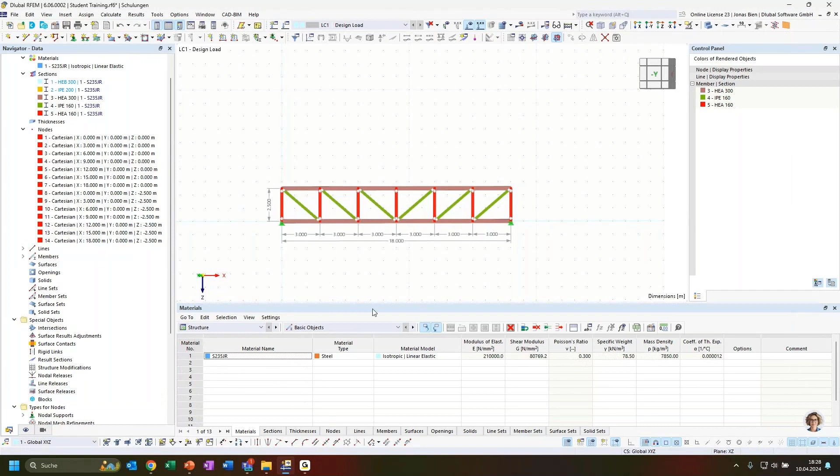One thing we should do with this model before we leave this example: in the block, these diagonals and posts were defined as beam members with hinges at the end to release the bending around the strong axis. But one task was to replace these beam type members with truss members. These truss members are like beam members with internal hinges already, so we don't need to explicitly define member hinges at the end to release the bending moments. I can just select all the diagonals and posts, switch the member type from beam to truss member, and that would be it.

So in that way we would have now the upper and lower chord as beam members, and the rest would be truss members. That should be it for this example. As I said, we don't want to calculate anything here, just to show you what we can do with our blocks. All right.

That leads us to the two more advanced topics of this online training session. We want to now tackle a more theoretical topic, which is investigating the differences between first and second order theory and how we can change between these analysis methods within our software.

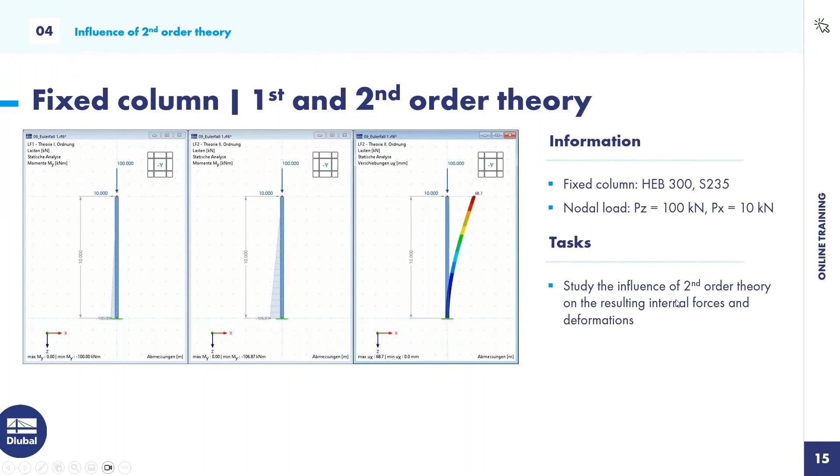As an example, we want to investigate a fixed column: a 10-meter column with a steel section HEB 300, with a vertical load of 100 kilonewton at the column end and a horizontal load of 10 kilonewtons also at the column end. We want to explore the differences between first order and second order theory in the first step. All right, let's model this column.

This is again quite easy. We model a member type beam, section HEB 300 again, and we want a 10-meter long column. It was also said we should fix it completely, so at the column base we have a fixed support.

You can see that since we have switched to the 3D model, we have actually 6 degrees of freedom that we need to take care of. That means 3 translational degrees of freedom, movements in X, Y, and Z axis, and 3 rotational degrees of freedom, rotations around the X, Y, and Z axis.

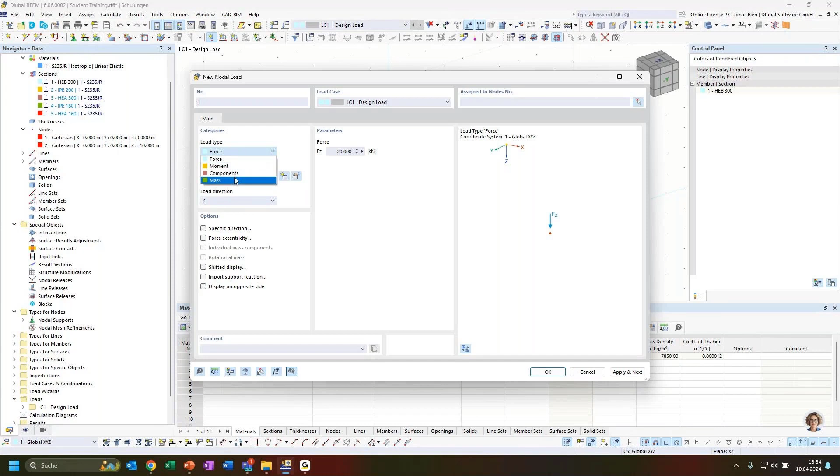Then we need the load at the column end. That could be a nodal load, and we should apply loads in 2 different directions. We could use 2 separate definitions for the nodal load, one for the load in Z direction and one for X direction, but we could also switch to the load type components, where we can directly input each force parameter and moment value at the same time, so I just need one definition for our loading.

I want to have a vertical load of 100 kilonewton and a horizontal load in X direction of 10 kilonewton. When I assign that to the column end, we see that this load is now displayed at the column end.

Now, in the first step, let's see what the results would be using first order theory. So we just use the default settings for the solution that we've used along this training session and check the results. It should be quite obvious, at least when it comes to the internal forces: of course we have an axial load of 100 kilonewtons in compression, which does not change over the height of the member.

Then we have a shear force in the strong axis of 10 kilonewtons, because of this 10 kilonewton load at the column end in X direction. This also generates a bending moment along the length. At the column base, this results in a bending moment of 100 kilonewton meter, which is the product of 10 kilonewton times 10 meter height of the column. Of course, that gives us 100 kilonewton meter. All right, so nothing too fancy.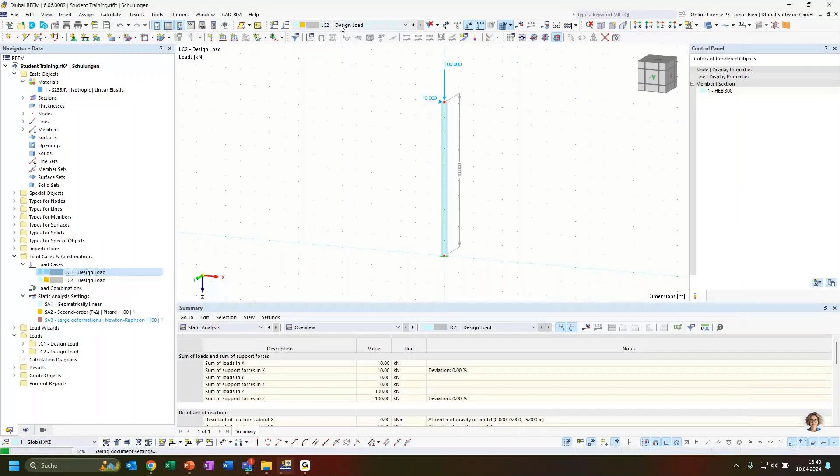So I just take the default static analysis setting for a second order theory analysis. I apply that to my load case that I just copied. And you see when I here switch from load case 1 to load case 2, of course load case 2 has not been solved yet, so I don't have any results for that, but the load is the same as in load case number 1. I just calculate the results assuming second order theory.

What have we got? We see that the deformation at the column end has now increased a bit, to 68.7 millimeters. Also we see directly that our reaction moment has also increased, from 100 to barely 107 kilonewton meter. So let's check the internal forces of our column. The axial force is still almost 100 kilonewton, constantly over the height, but there is a rather large difference in the shear force over the height and also of the bending moment.

So if we analyze the bending moment values, we see, and maybe we can also set the wireframe model to see that. We can't really see that on the top node, but we see that at the rigid support we have now an increased bending moment, and that increase of the bending moment of 6.87 kilonewton meter directly corresponds to our vertical load of 100 kilonewton times the horizontal deflection of the column at its tip.

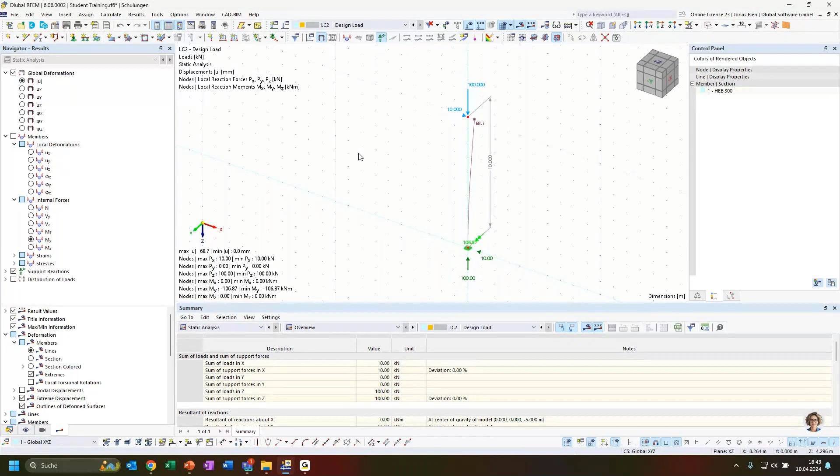I also want to show you how you can compare the results maybe a bit more easily. You could, of course, always switch between the load cases to show the different results, but you could also generate a new window for this model and then split the view vertically to get this result 2 times, and then on one window switch to load case number 1, and on the second one analyze the results for load case number 2. That would make it more obvious if there are any differences in the results. So you can then always activate one of the windows and adjust the result quantities to check and compare directly the results.

All right, but let's switch to one window and concentrate on the next information I will give you. So as I said, in this case, we have an increase of the bending moment of around 7% just by switching the analysis type from first order to second order theory.

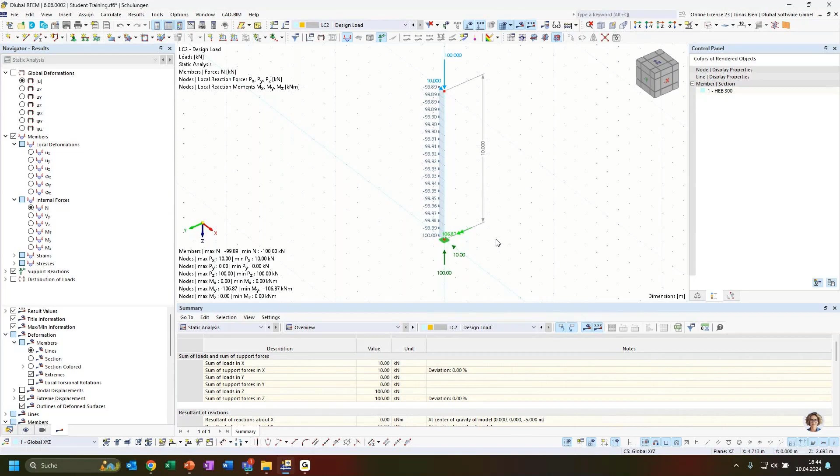So that may be neglectable. I mean, it's less than 10%, but it's still quite significant. And also the problem is that for such structures, the dependency between the load and the reaction is no longer proportional to each other when we take care of the deformed structure and calculate our equilibrium based on it.

So, for example, we could now in the second load case double the load. And I want to show you, let's compare the reaction we are getting now. As I said before, we had an increase of the resulting bending moment at the column base of 7%. But now if we compare the results, we have an increase of almost 15%. So we would expect 200 kilonewton meter from our horizontal load, but now we have 30 additional kilonewton meter just from the vertical load times the deflection.

So we no longer have a linear or a proportionality between the external loading and the reaction force. So that needs to be taken or kept in mind.

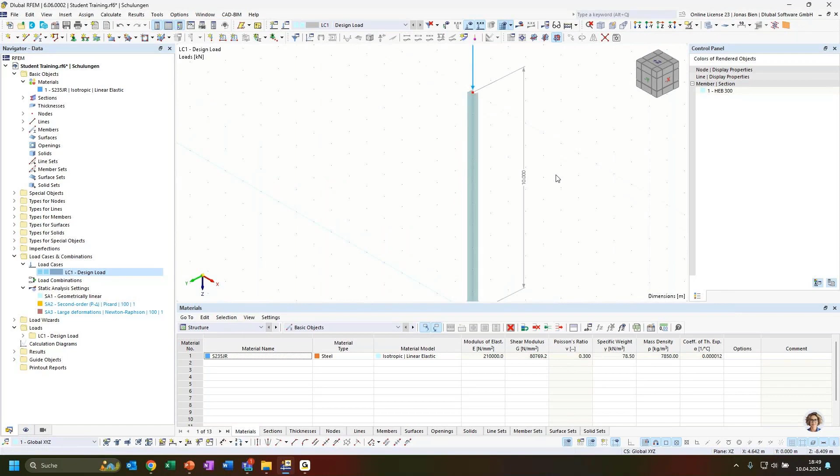This particular problem is maybe already known to you. It's basically a prismatic member under compression, under pure compression, with certain boundary conditions. This is also known in engineering as Euler case number 1. Leonhard Euler dealt with such instabilities of members loaded in compression already in the 18th century, and he provided analytical solutions for such problems that we are now investigating 250 years later still.

We want to use the solution of Euler, or compare Euler's analytical solution for this problem, which is generally accepted among the engineering scene, with the results of our numerical calculation. So the next example, or the next task, is for this particular case, a clamped column under pure compressive load, to define the critical load factor of this cantilever column where it gets unstable.

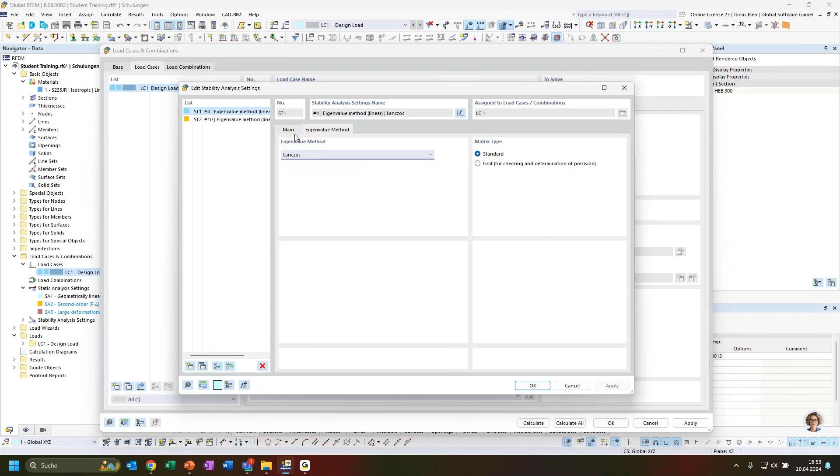We can also say how many eigenmodes or eigenshapes we are interested in. Basically the stability problem is solved by an eigenvalue analysis, and for each eigenvalue that we calculate with this method, we will get an eigenshape of the structure, so we'll also be able to see how the structure deforms when it gets unstable. For this very simple model, 4 eigenvalues and eigenshapes should be enough. There are also some different solvers that we can use for the eigenvalue determination, but for such a basic problem, the standard settings are very well defined, and we can go ahead and calculate the load case with this additional option to calculate the critical load.

Now you see that before the structural stability analysis is done, actually a static analysis is done, because the loading in the system must be known for the eigenvalue analysis.

And accordingly, we get for this load case now two different result options. We can choose between the results for the static analysis, that is what we have investigated so far, so we have looked at the deformations and the internal forces and so on. But we now also get the results for the stability analysis.

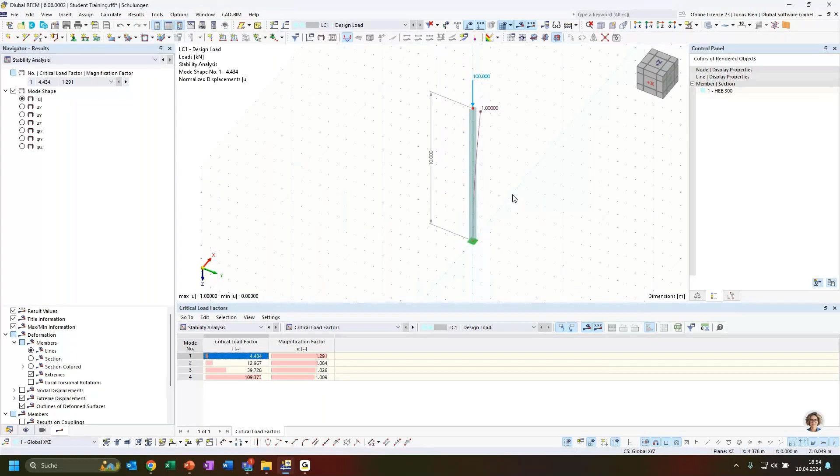And this is interesting because it gives us the critical load factors. These are the factors that we can multiply the external loading with in order to get our instability load, or the critical instability load that leads to an unstable system.

We can see them in this drop down here and also in the table. We also get a magnification factor. This is basically a value that can sometimes be used to multiply or determine forces according to second order theory, by just multiplying first order theory internal forces by that factor. In some codes, for example in steel design, this is sometimes allowed as a way to calculate second order theory bending moments without actually calculating according to second order theory, but this is not very commonly used.

I just want to highlight that this magnification factor here is denoted by the alpha value, and sometimes the alpha value is also mentioned as a parameter for the critical load factor. So I don't want you to confuse this critical load factor, which is the multiplier for the critical load determination, with this magnification factor, which at the moment is not very important to you.

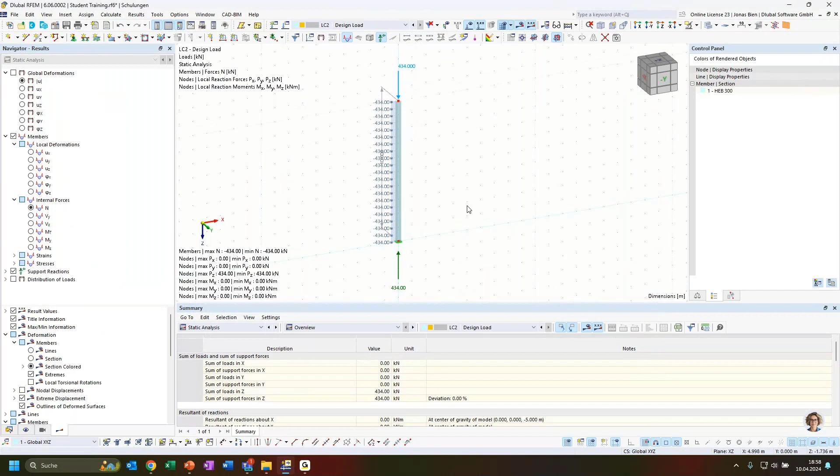But now if we increase the load just slightly to 435 kilonewton, let's see what happens. We try to solve the problem, and we are still able to solve it. Okay, that's unexpected.

Let's analyze again. I messed up the number, so it should be 444 kilonewton, which shouldn't work anymore. That's above the critical load we calculated with our structure stability add-on, and this should actually fail. Yeah, and it does. It now gives us the error message that the structure is becoming unstable and we cannot find a solution when calculating according to second order theory.

So this is a nice finding with our stability analysis add-on. We also get a third and a fourth eigen mode, which are higher buckling modes of the member. These aren't really interesting for us because in the end, most likely the critical load factor for a structure will be the smallest one.

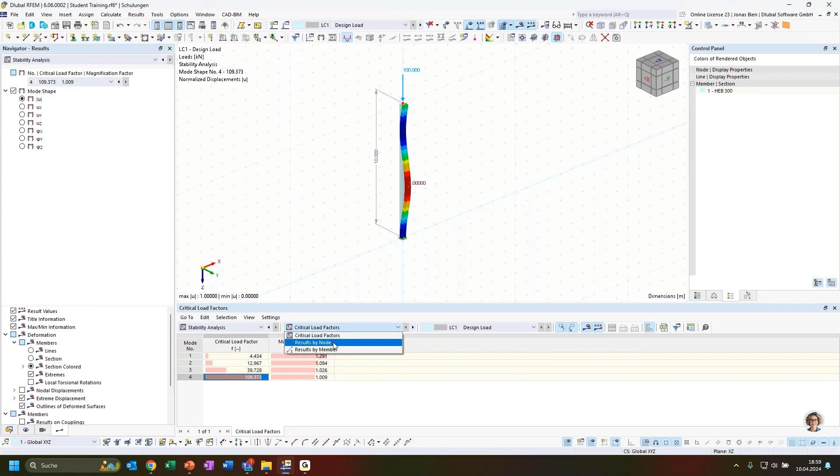But the critical load factor and the eigen shape are not the only interesting outputs of the analysis. We can also go to the results by member table, where we get effective length factors and effective length values that we can use for stability design of this steel column. If you've already performed a steel design or stability design for buckling of such columns, you've probably used the equivalent member method.

By using this equivalent member method, you need to define a critical buckling length as an input. This critical buckling length is calculated for you for a particular system by our stability analysis add-on, and what's done in the background is quite easy. That would be the Euler formula that Euler determined for calculating the critical buckling load for those simple column systems.

When we know our critical buckling load, determined by our eigenvalue analysis, we can rearrange this formula to determine our effective buckling length. For this particular Euler case number 1, the critical buckling length should be taken as twice the system length.

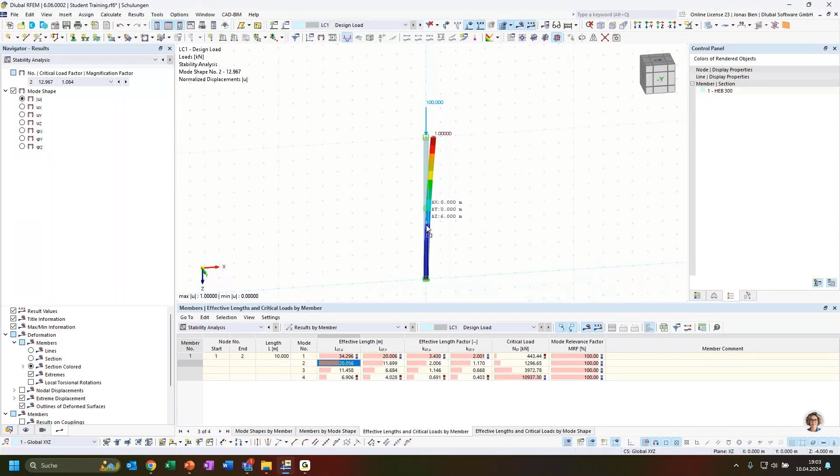For example, we could take this column - and this is the very last example - and turn it into a simple moment resisting frame. I'll just duplicate the columns and add a girder to connect these two columns. Apply 100 kilonewtons to each of the columns, and now we could do the same analysis we did just before with one column.

We could even go so far and leave the length at 10 meters. It's not exactly what the example asks us, but anyway, we should get a solution for this, and for comparison reasons, it's probably nicer to keep it as it is.

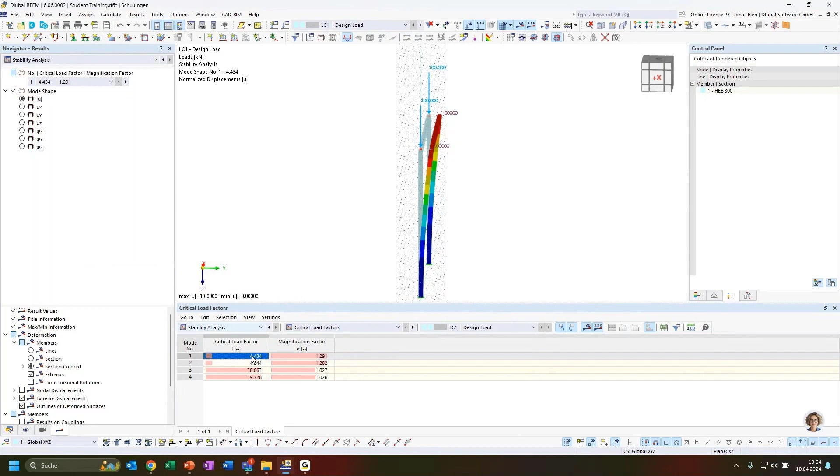So again, we calculate our stability analysis results, and what we get here as critical load factors is quite interesting, because the first critical load factor didn't change at all. For buckling around the weak axis, it didn't help the system that we now have a second column connected by a beam. The whole frame would buckle around its weak axis and have the same critical load factor as before. But let's take a look at the second mode shape.

This would be asymmetric buckling, but also out of plane, around the weak axis of each particular column. In this case, the girder wouldn't do much either. But now, when we analyze the third mode shape, that represents in-plane buckling of our frame. For this kind of buckling, the critical load factor increased from 12 to 38, because we built a frame, and this girder - the horizontal member on top - actually increases the stability of the system significantly.

That we can already see by analyzing the critical load factor for buckling around the strong axis of the columns. We could also read for such more complex systems, it's still quite easy, or quite a simple structure, but still we could imagine an industrial hall made of frames, and we could do it, analyze the effective length the same way.

We could actually now, for our mode shape number 3, which represents this in-plane buckling, derive our effective length factor for the equivalent member verification check for this steel column from the Steel Design add-on. In this case it wouldn't be 1 or 2, which we would get for Euler case number 1 or Euler case 2, but it's some value between.